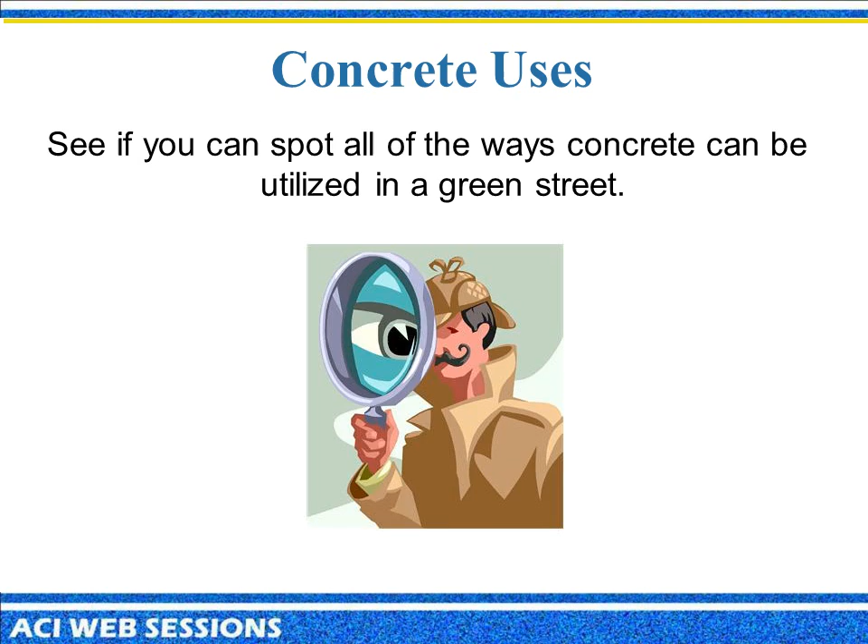Safer walking surfaces. I've been doing quite a bit of biomechanics work with pervious concrete and different pavement surfaces, and this is a number one concern for elderly people. As the population ages, they are very conscious of the surface texture of their local pharmacy, their local grocery store. If they perceive it as a slippery or unsafe surface, they do not go there. They'll drive farther across town to go where they think it's safer or brighter, and some of these people you don't want driving farther to find a safer surface.

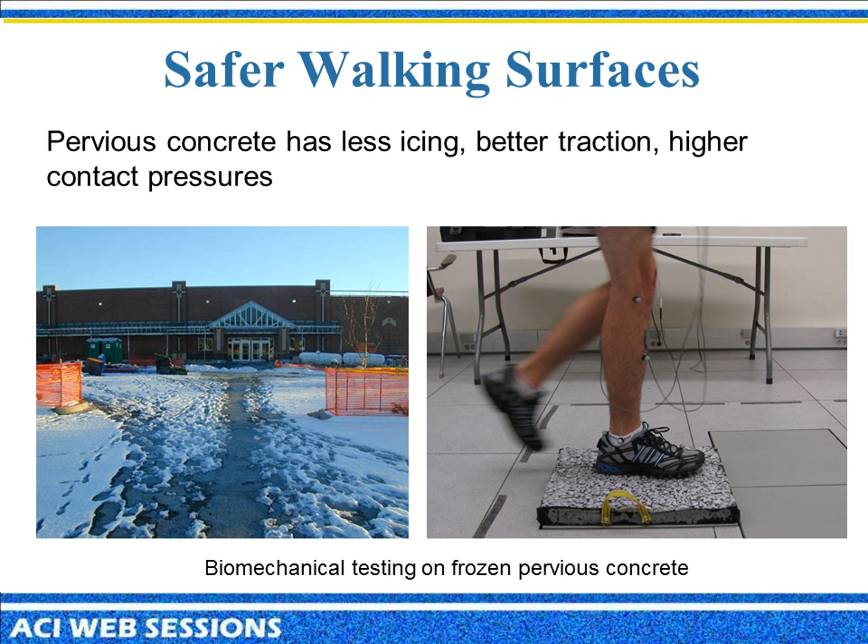I'm a civil engineer and I've got a biomechanics grad student right now, and we're looking at the biomechanics of walking on frozen, wet, icy pavements. We know that snow, ice and water go through pervious pretty well, but it turns out we can quantify that it is a much safer walking surface. It melts off quicker, it's got a higher coefficient of friction on that initial slip, and these are safer pavements. So things that are hard to quantify, but to consider as well.

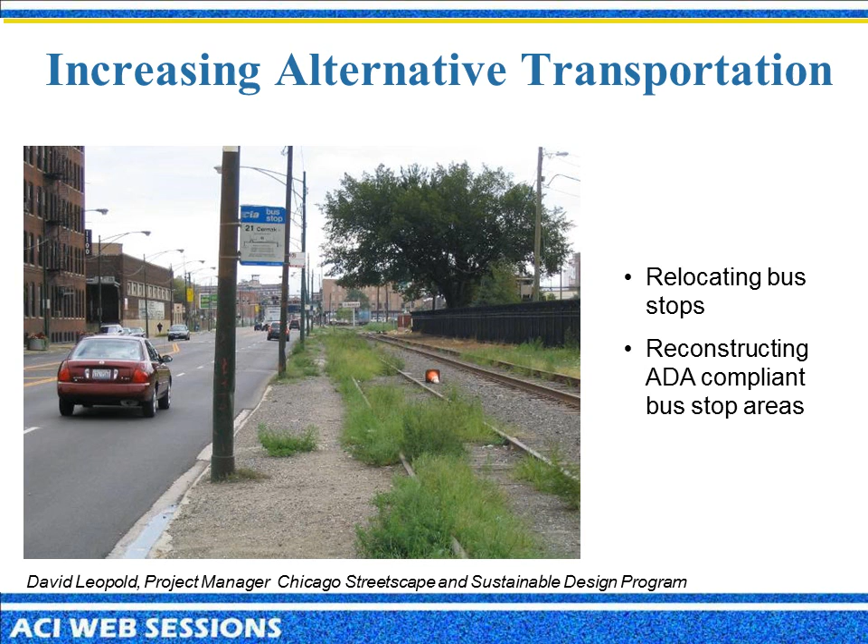Alternative transportation, relocating bus stops, making bus stops ADA compliant. I waited at a bus stop like this yesterday that's kind of in not the greatest areas. So if we want to increase the use of alternative transportation, you have to invite people to want to use the alternative transportation. Improving access to alternative transportation.

So here's Cleveland. We've got clearly marked bike lanes. You go to Boise, Idaho. All new subdivisions in Boise have bike lanes that do not cross roadways. So if you want to ride to the center of town from 3-4 miles away, no problem. You're not crossing roads. You don't have any stoplights. If your children want to ride to school, you're not worried about them crossing traffic. That's a very nice place to live. If you feel like you can ride your bike, you might ride your bike more.

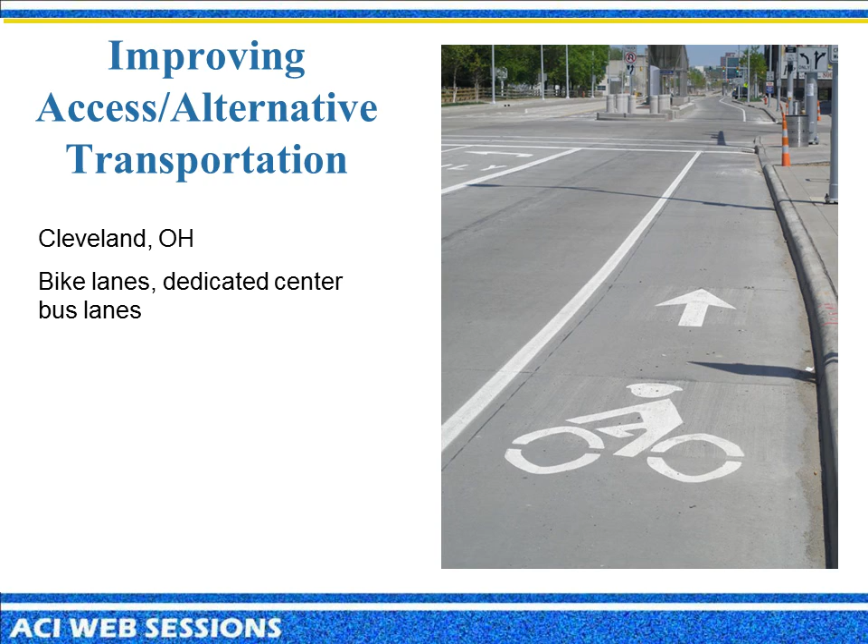And then we pulled this from the City of Chicago's webpage, but this is kind of integrating design here. So we've got light-colored, permeable sidewalks, and we've got some integrated stormwater designs, and we've got some permeable pavements or optimized pavement designs there, and then we've got optimized bus lanes.

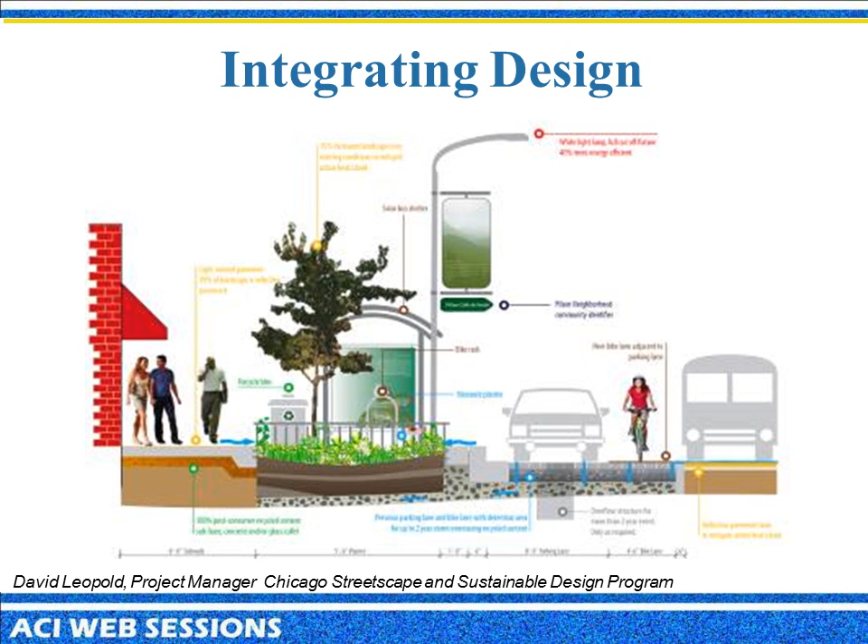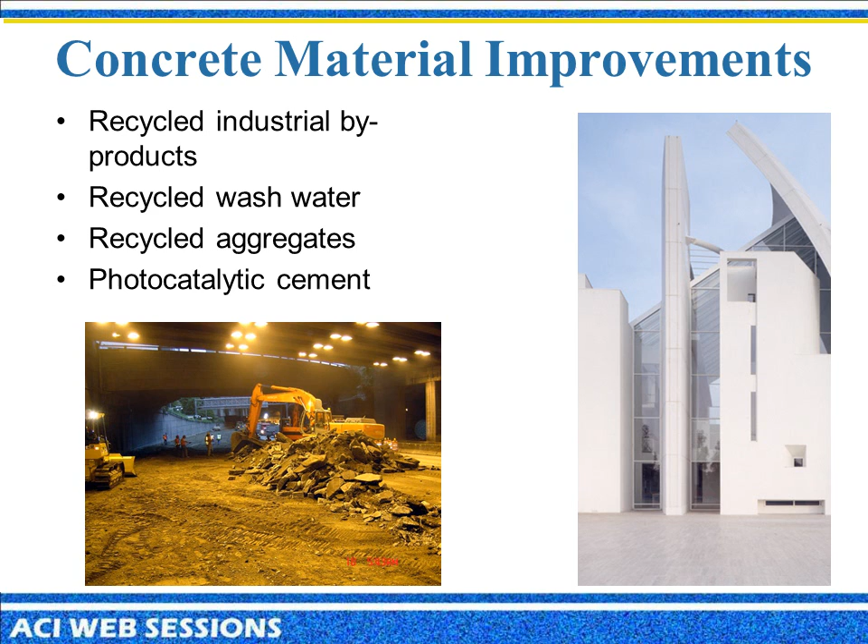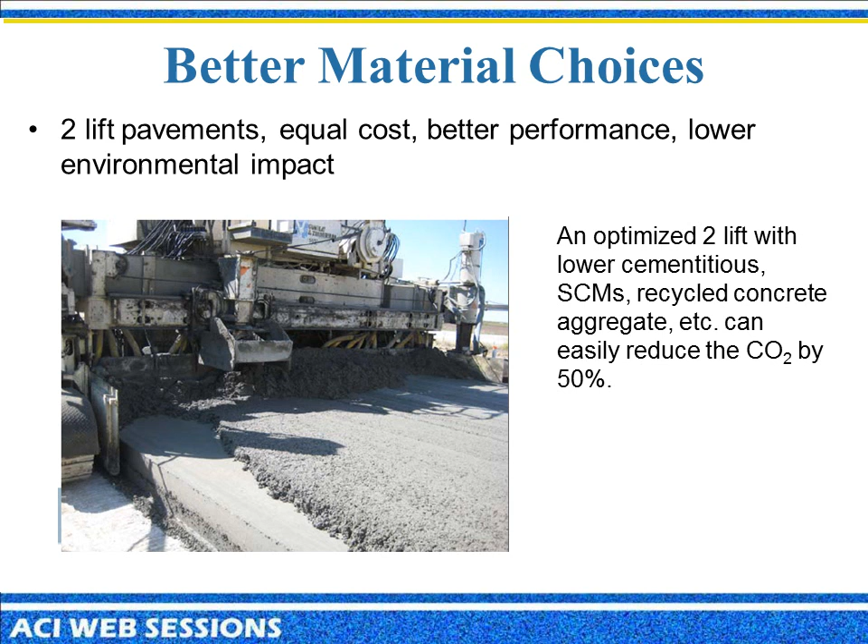So let's draw all these things together. So material improvements, we use industrial byproducts and recycled wash water and aggregates and all the good stuff that we've been talking about here. Better choices, again, two-lift pavements that Tom showed. If you've got the same performance, more recycled materials, lower CO2, lower cost, it's kind of a smart idea.

Managing stormwater. Green Streets, Pacific Northwest, this is what comes to mind. So originally, before we were all here, it was great, and the rain fell, and it soaked in, and everything was perfect, and then we put our streets in and ruined it. But streets do a lot of good for us, too. But the idea is we want to get some more water back into the ground. Do that by mimicking our former site hydrology, so do that by storing some water on site instead of letting it run off really fast. Let it infiltrate into the groundwater, let it evaporate, let it uptake in plants, and let it get detained.

So if you look at this presentation, I've got some pretty decent references on there. If you're looking for low-impact design manuals that are available, City of Seattle's got their right-of-way manual. Portland has a stormwater manual that's real good. And so there's links in here that if you see some of these pictures and you say, where'd that come from? I'd like that design. Go on the web page, pull it up. They've got some fairly developed designs that you can apply anywhere.

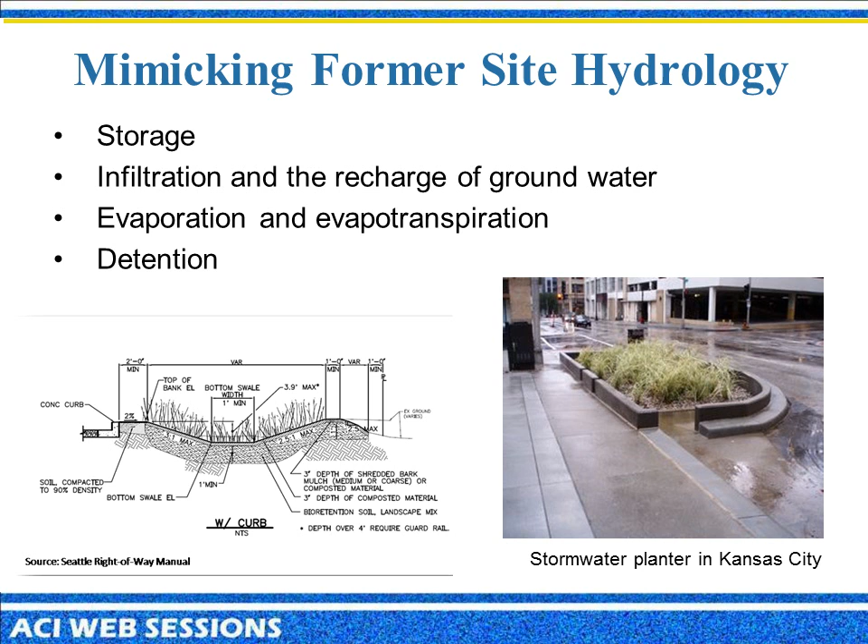So if we're talking about the stormwater technologies for Green Streets, we're really looking at three major ideas here. So we've got curb extensions, where we just take our curb and bump it out. We can dig down into the pavement, or we can do it on the surface there. We can do our permeable pavements, and then do stormwater planters. The water goes in, it's detained. Some evaporates, but we're going to clean it as well.

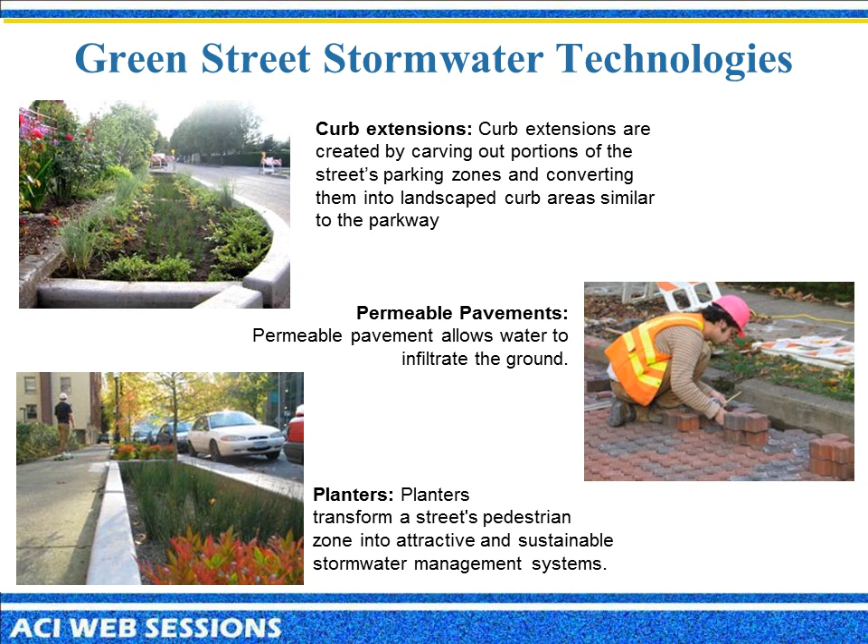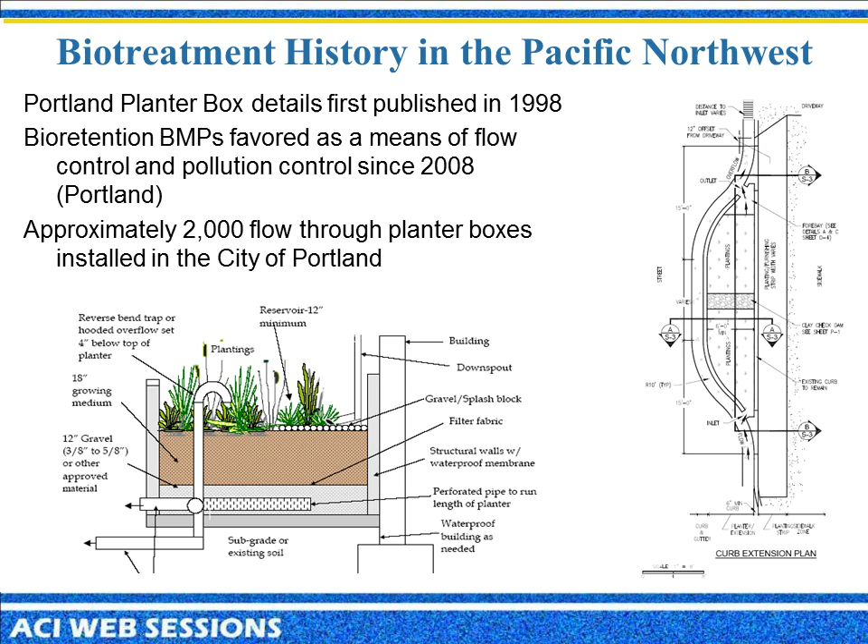Okay. Biotreatment, Pacific Northwest. They are farther advanced than most everybody else, but really started in the late 90s. Bioretention BMPs are now their preferred means of control in the street arena. Portland's had it since 2008, and the City of Portland has 2,000 plus flow-through stormwater planters. So this is a pretty widespread technology here. Water comes in, here's a curb cut, we've got our plantings in there, some check dams, water flows through, and then whatever is clean, slowed down, goes out the other side.

This was the 2006 American Landscape Architect of the Year award winner. This is the Siskiyou Street curb extension. We've got a residential area, need to treat stormwater, and don't have any place to put a traditional detention pond. So what they did was take two stalls, with water running down the curb line, and put these curb extensions on there to manage the stormwater. It helps with the stormwater volume, helps with the rate coming off there, and helps with some cleaning.

They do like this. It's traffic calming, so you are now funneling traffic there. You're only dealing with one car each direction, so it's helping with some pedestrian safety with pedestrians crossing right there. So here's a close-up. Got plantings, again, cut in there. We've got a couple check dams and some plantings in there.

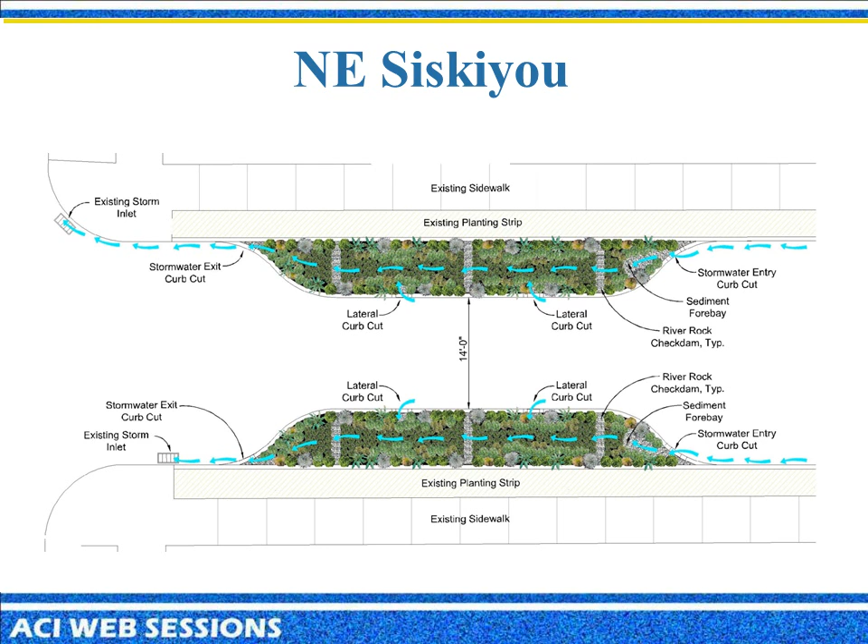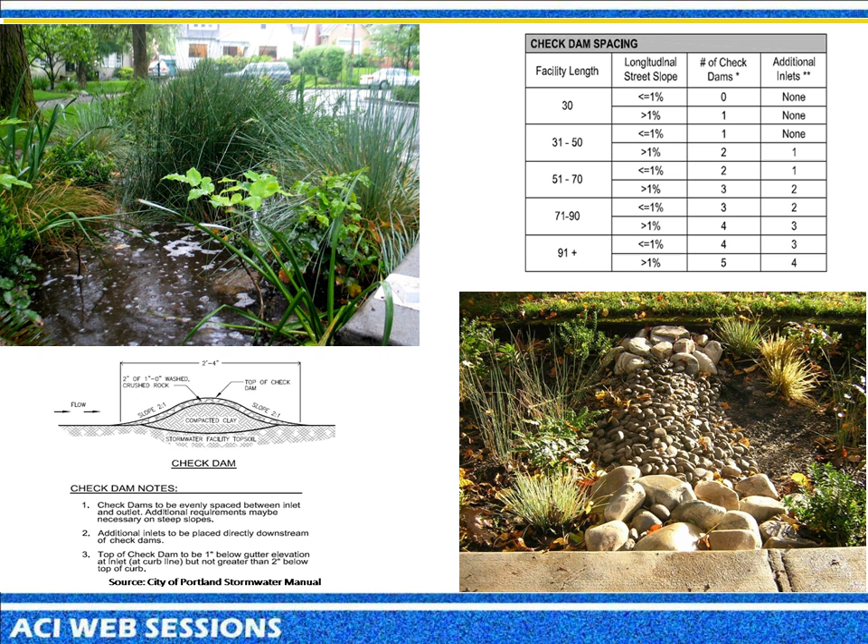So what's this thing look like? Here's a picture of check dams. We've got our topsoil, compacted clay, water comes in, got some dams. So if you look, here's a City of Portland Stormwater Manual. If you're worried about check dams, we actually have a check dam spacing guide. So there are some, I'd say, very developed design guides out there for putting these things in. So if it looks good, it looks great.

But other things to think about: we're now taking a green construction and putting it in our downtown area. We're putting it in a heavy urban area, and there are some additional considerations. Our bioinfiltration media has some sort of design infiltration rate. Same thing with pervious concrete. If we put it in, it's got a good infiltration rate, and then if we don't protect it from construction run-on of soil, we plug the whole thing up. It happens with pervious all the time. It can happen with stormwater planters. You can't let all the crud come in there before it's completely built.

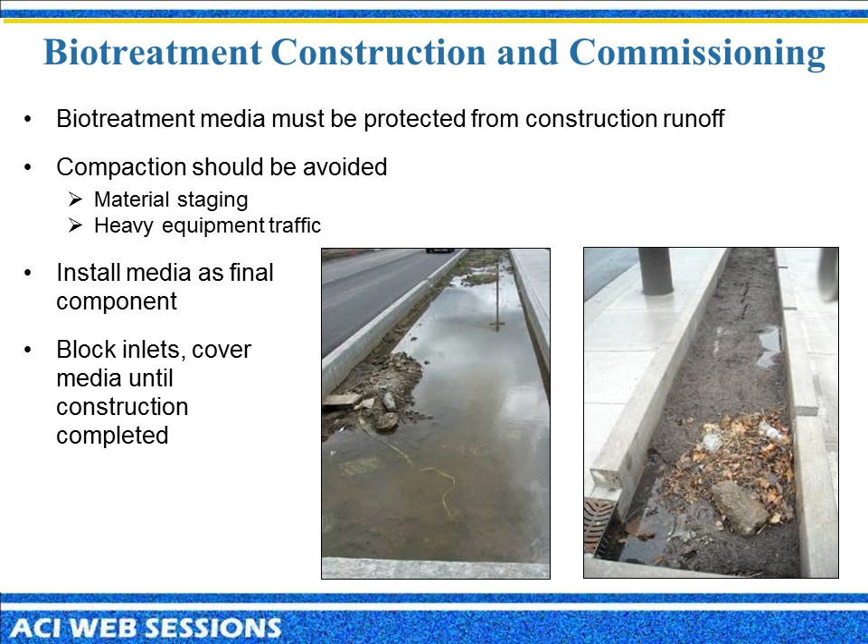Compaction should be avoided. Normally we compact our soil, but that is completely contrary to getting water in the ground. So if we're trying to get water in the ground, we have to watch the level of compaction in the soil. Typically, we'll put our media or pervious concrete in as the final component. And a lot of times we'll block these out so we don't get all this construction crud coming in and plugging it up first thing. Inspection and maintenance: same with lots of different BMPs, these do have to be inspected and maintained. They're not natural systems. They're supposed to mimic, so we have to clean out some of the trash every now and then.

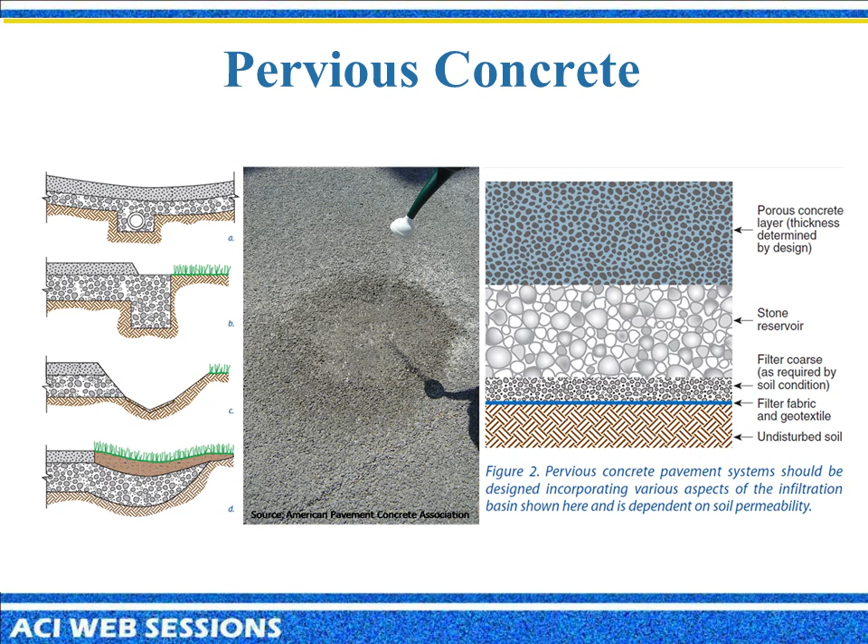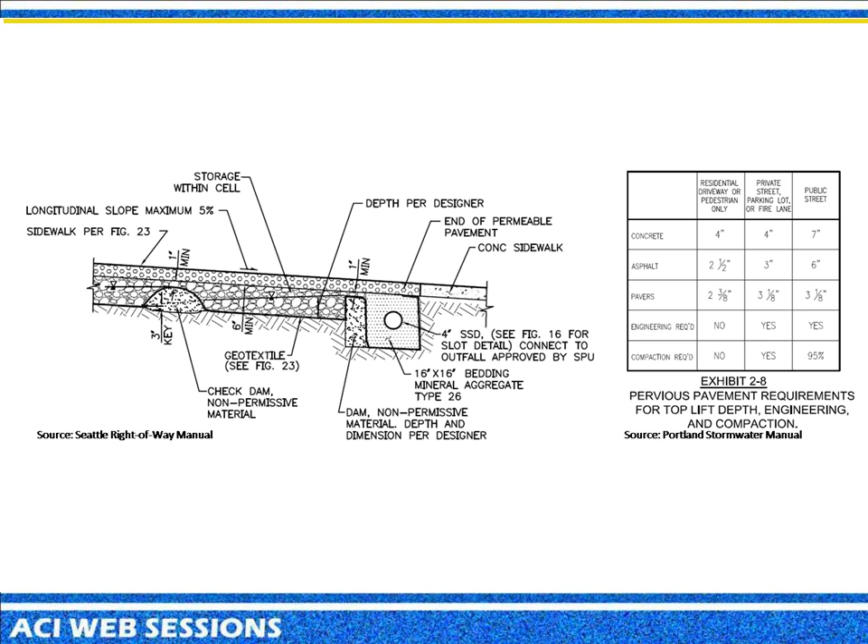We've mentioned pervious concrete a couple times. This is taking our detention pond and putting it underneath our pavement. The top pervious surface is just a mechanism to get the water through the pavement rather quickly so it can back up and infiltrate into the ground. What about designs? We've got the Seattle Right-of-Way Manual, Portland Stormwater Manual. We've got thickness design. We've got engineer requirements. These things are available online. If you need to go get the specifications, they are available.

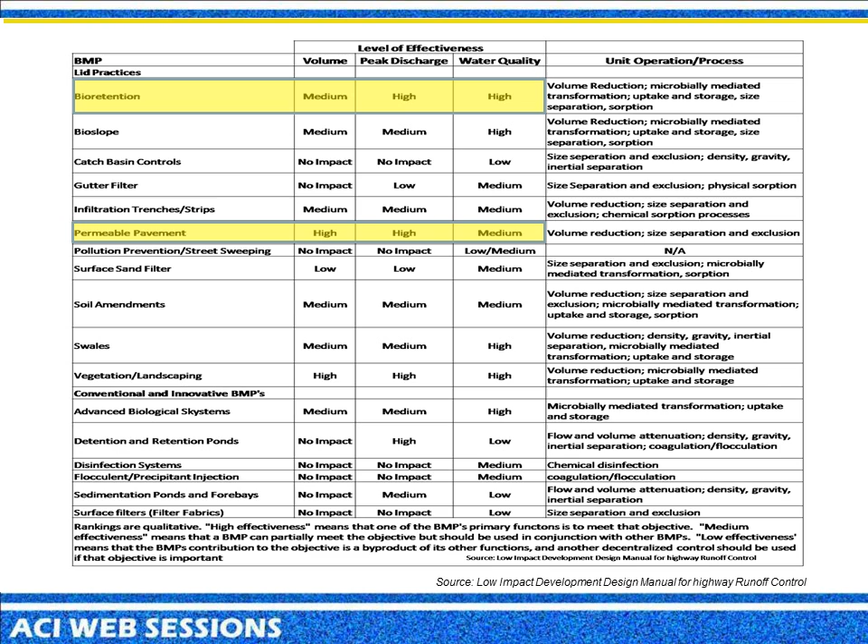Again, this is the Low Impact Development Design Manual for Highway Runoff Control. This is Washington State, but we've got different BMPs that are available, operations, permeable pavements, bioretention in there, what they treat, and where to go for the design. So these are available right now.

Urban heat islands: dark impervious surfaces absorb more energy. During the daytime they get hotter. They don't evaporate water. We get higher overall temperature. We have health problems. We've got higher energy demand. All these kind of bad things. Traditionally, what we think with urban heat islands is the downtown area is really hot. We have a whole bunch of CO2 generation and excess heat generation in the downtown area. CO2 is kind of the easy greenhouse gas to look at.

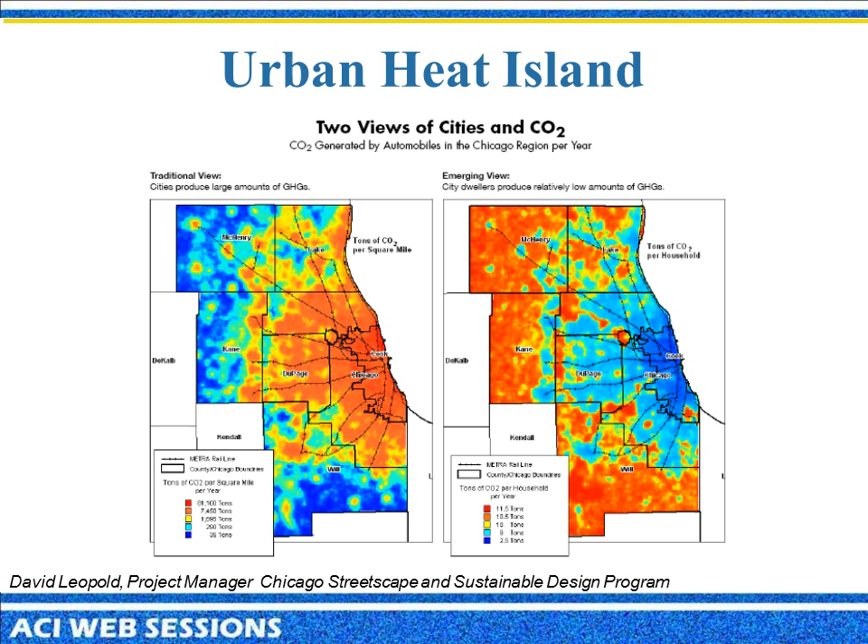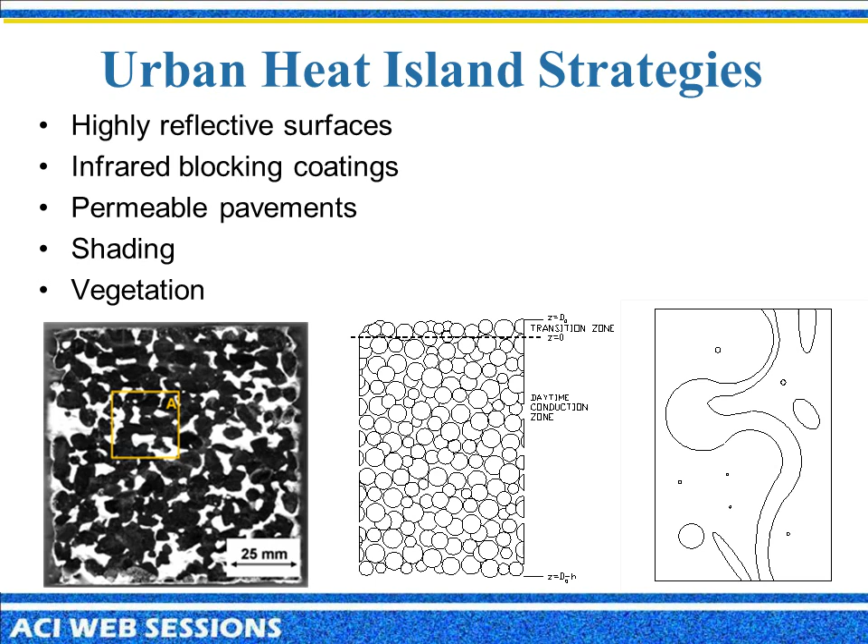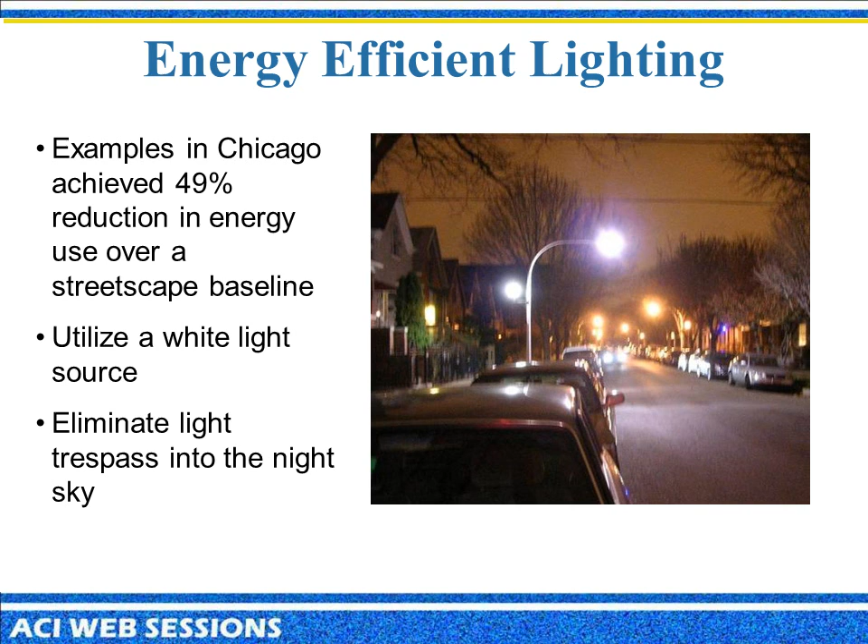Energy efficient lighting: if you've got brighter pavements, you can space your lighting out farther. Chicago's done a couple tests, and they've had a lot of success with using white light, low energy lighting, and spacing them farther apart.

Construction emissions. If we use more durable materials, we're rebuilding it less, maintaining it less, we save construction emissions, but then also using more efficient construction equipment. And this is part of the Greenroads advocates using the EPA Tier 4 emission standards on the construction equipment.

Here's an example. We take an underground mine tour with the students. They don't use electric. They don't use non-emitting construction equipment. They use the regular EPA Tier 4 diesel construction equipment down in the mine. You stand next to those, they're not belching out black fumes. You can hardly smell what's going on. We do have these technologies available.

And then public education. So it all works great, but if the public is still pouring antifreeze down the drain, we've kind of missed the whole point here. So talk about car washing, how to properly throw away chemicals, how to properly apply fertilizers, monitor soil erosion, and then littering and pet waste are also big areas of public education.

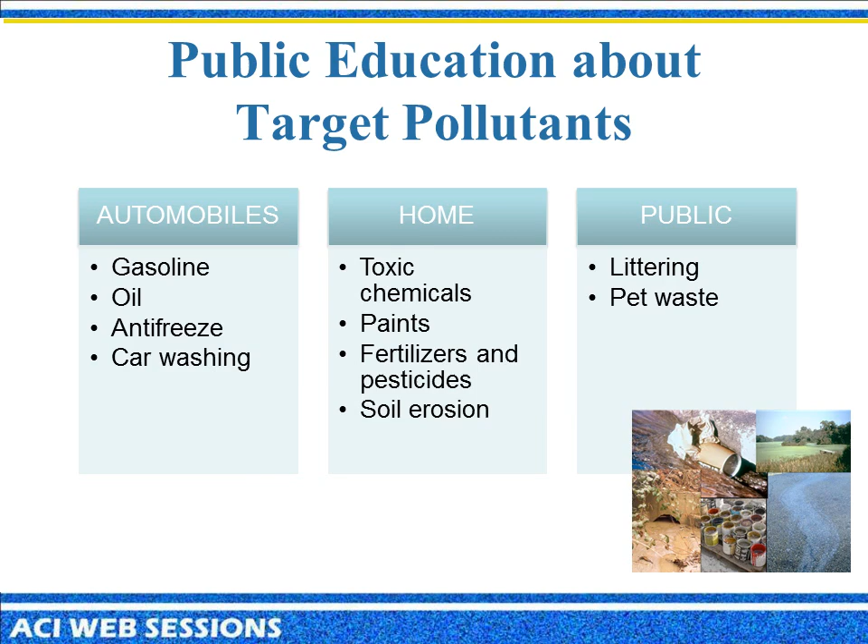Couple case studies. Austin's got a Grow Green program where they're trying to help you optimize your fertilizer and then trying to pick up pet waste. And they reduced 135,000 pounds of pet waste. This normally goes into the stormwater. We can have a little bit of education, some really big improvements.

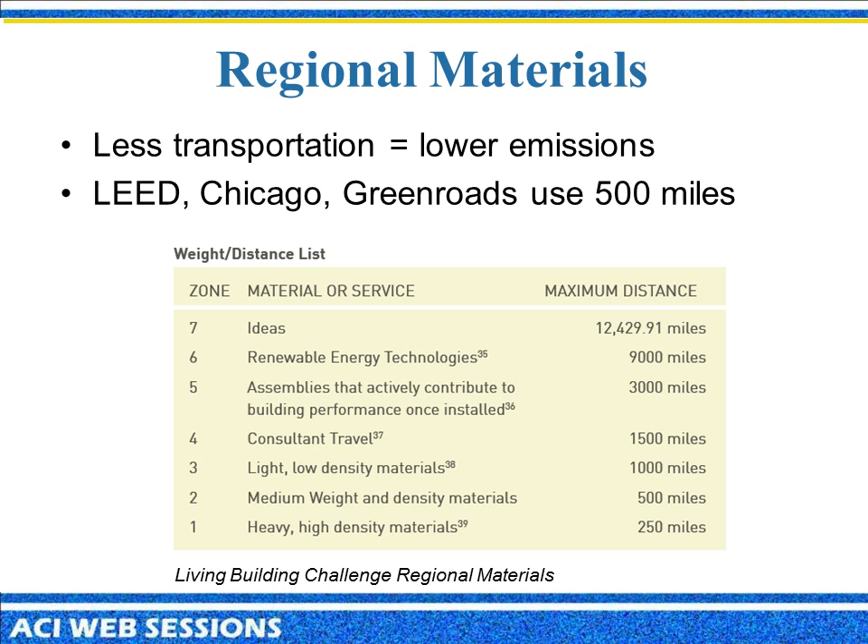And then regional materials, Living Building Challenge. LEED uses 500 miles. Some of the different rating systems use lower miles for heavier materials. So what's a green street? Trying to look at everything at the same time. So for more information, here's some real good stormwater management design manuals.

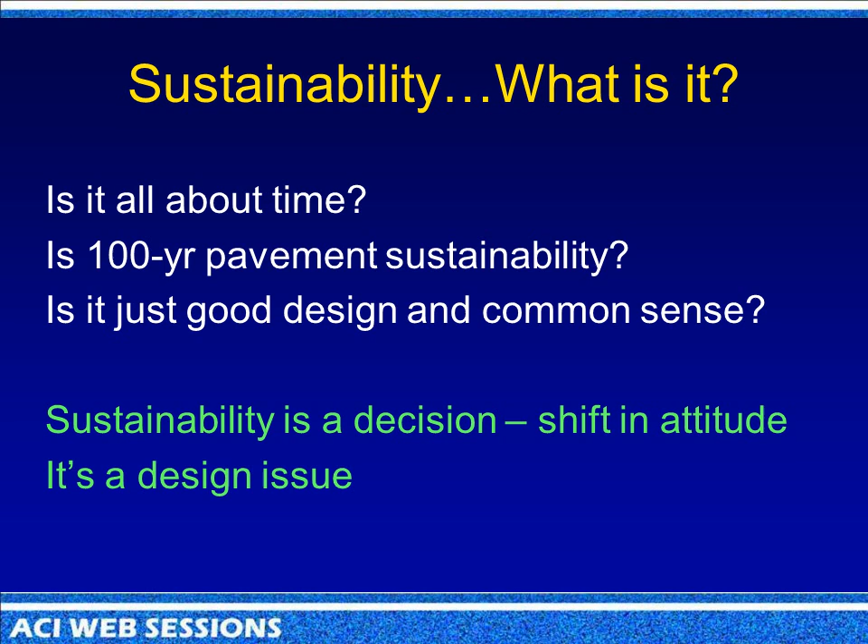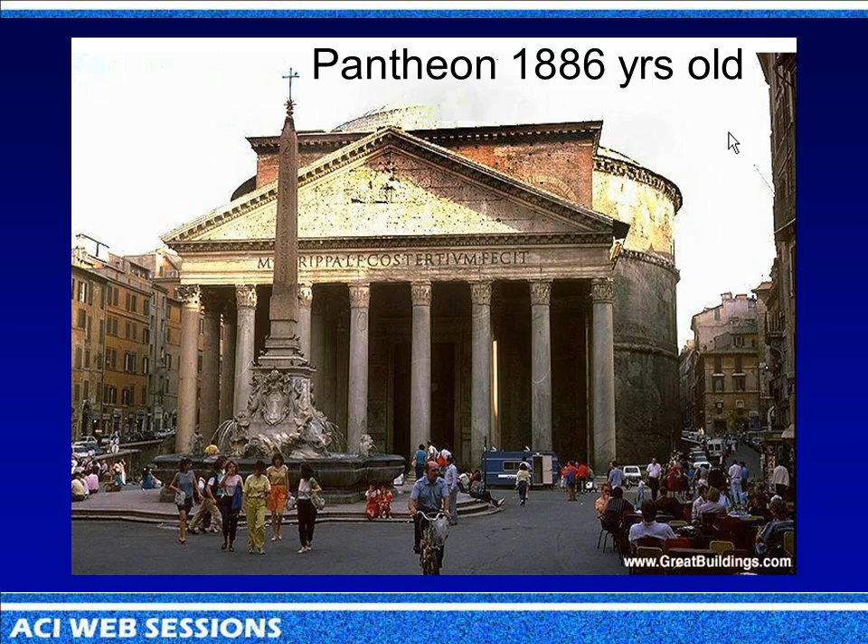Here's a great example of where the engineers knew about sustainability. The political and the economic part of that industry did not, and the Roman Empire collapsed. The reason I point this out to you, see this dome on top? This dome is lightweight concrete. It's been around a long time. Now, you might say, well, there's no trucks driving up there. There's no freeze-thaw up there. Well, take a look at this.

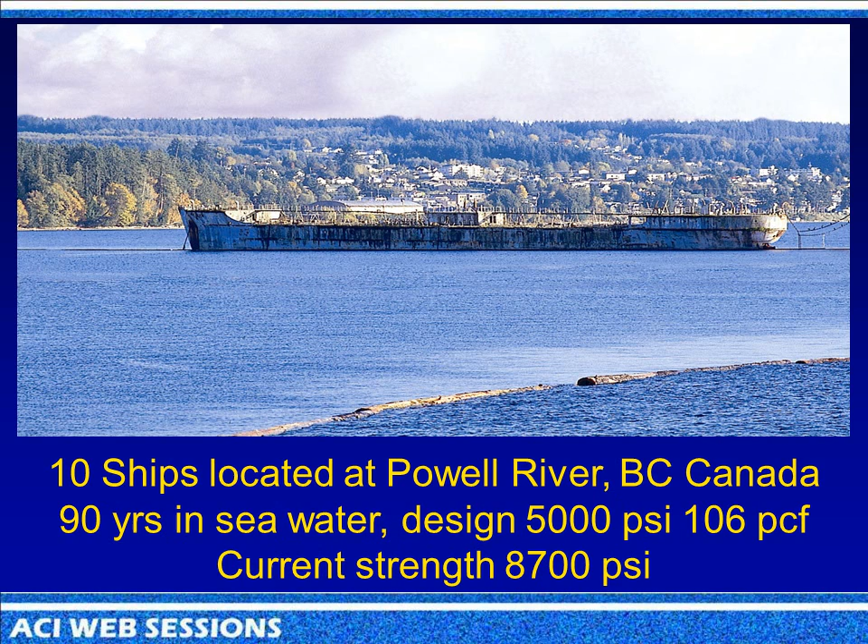This is a concrete ship built 90 years ago, 100% lightweight. The hull of this ship was only 4.5 to 5.5 inches thick. 100% lightweight concrete. And here's its sister ship that was built the year after that one. It's still floating today. Now, it looks a little banged up, but if you were out in seawater and freezing and banging around, you might look a little banged up too, but it's still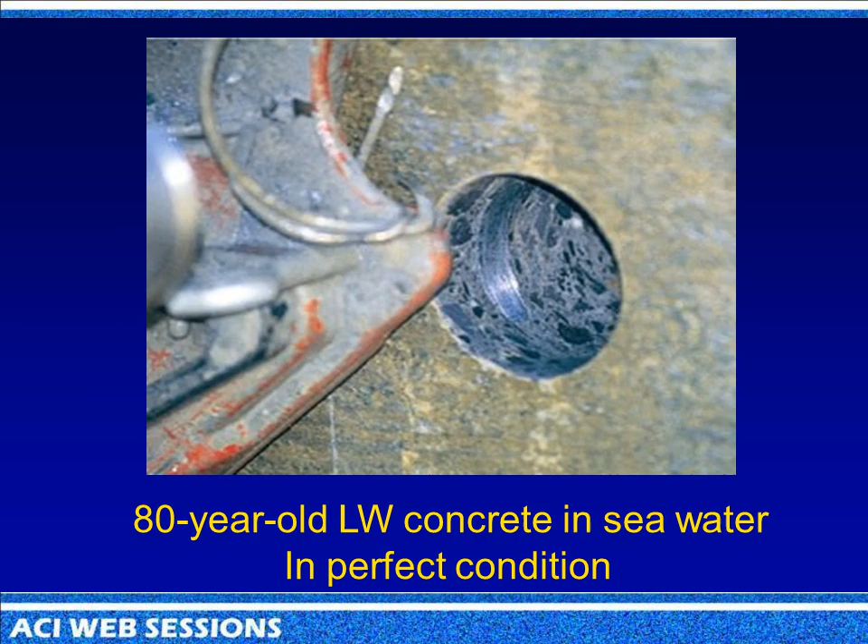floating. And we went out there 10 years ago, and CTL core drilled it. This is in the splash zone, so take a look at this. There's only 3/4 of an inch of cover over that steel. This concrete was in absolutely perfect condition. CTL wrote a big report about it, and they said it was a pleasure to look at concrete that was in perfect condition. No air entrainment, folks. Zero air entrainment.

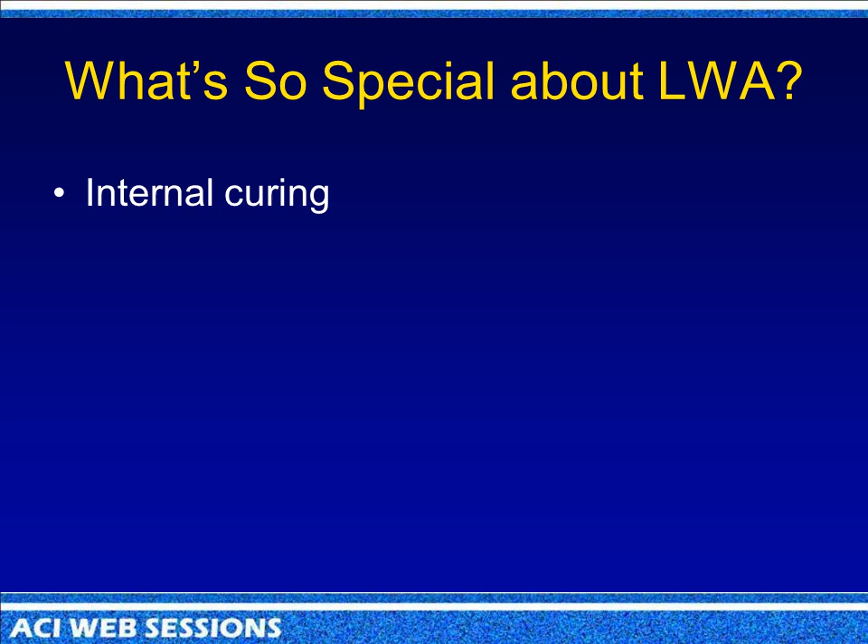So there's something special going on with this lightweight aggregate, and what is it? What we're talking about is a material that's half the weight of sand and stone and gravel and dirt. So what's going on with this stuff? Well, it's internal curing. It's a unique process that just happens naturally. So the use of internal curing, I call, is a common sense addition to the sustainability of concrete. Now, it's not new. We've been doing this since the 1950s. We called it self-curing. We called it lightweight concrete.

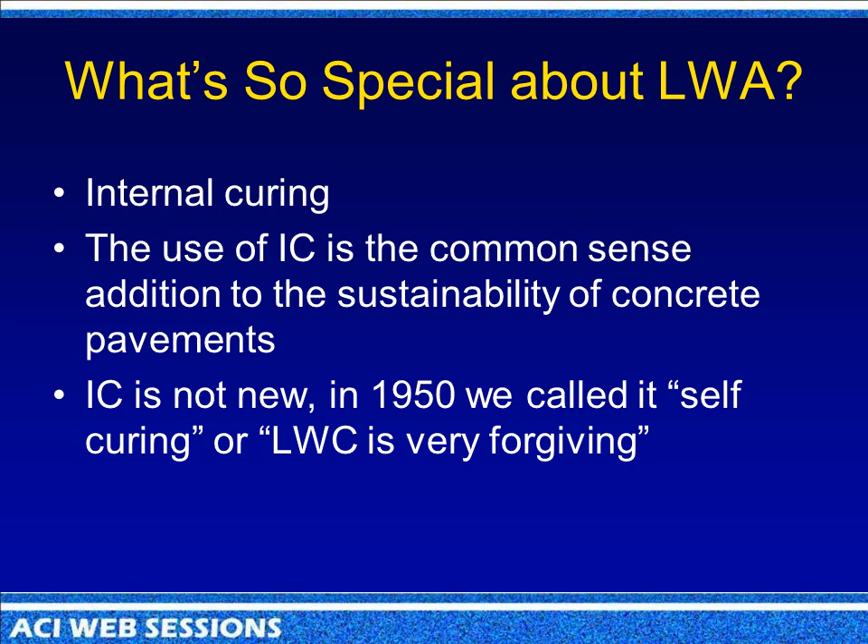It's very forgiving. In the field, they abuse lightweight concrete. They abuse it bad. They pump it up there at 10-inch slumps, and it always performs. Here's the basics of internal curing. The one on the left is just a regular Portland cement mix, or it could be fly ash. When it hydrates, as you can see, all this water in here, it creates a void. In other words, it's starving for water. Well, you add lightweight aggregate to that same mix, and the lightweight aggregate has absorbed water in it.

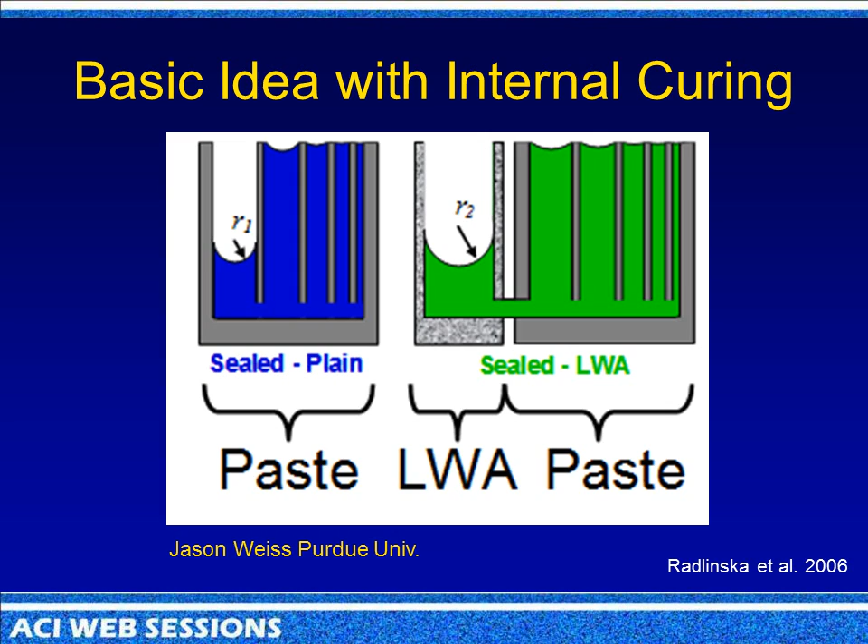Well, it pulls the absorbed water out of these larger pores, sucks it into the cement paste, and therefore you always have 100% moisture needed for the hydration of the cement. So what is internal curing? Well, here's the ACI definition.

I'm not going to read that for you, but they add pre-wetted lightweight aggregate, and it's to help hydration, and it eliminates self-desiccation. This is a big thing. And they predominantly use fine aggregate. Fines or intermediates, and they don't use a lot. It's maybe 300 to 450 pounds, 5 to 7 cubic feet per mix. And it's especially helpful for high-performance concretes with low water cement ratios and supplementary cementitious materials. But it's beneficial for all concrete.

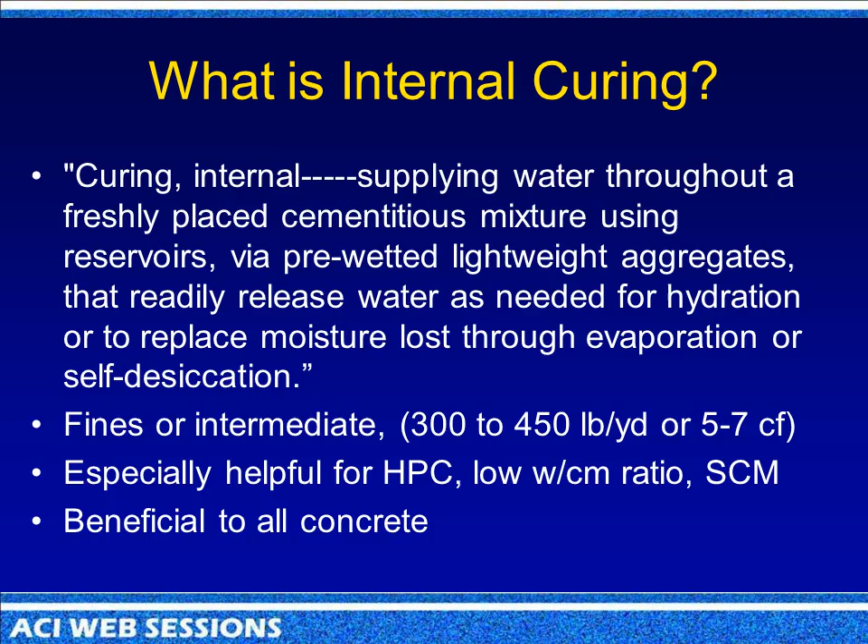So internal curing, here's a great study done down in Chile by Dr. Lopez. I don't know if he's in the room, but he's running around out here. They did 10 concretes, water cement ratios going from 0.4 to 0.5. So these are not high-performance mixes. These are day-to-day mixes. They stripped these things at 24 hours. They let them set at room temperature and at 50% relative humidity, and this is what they found.

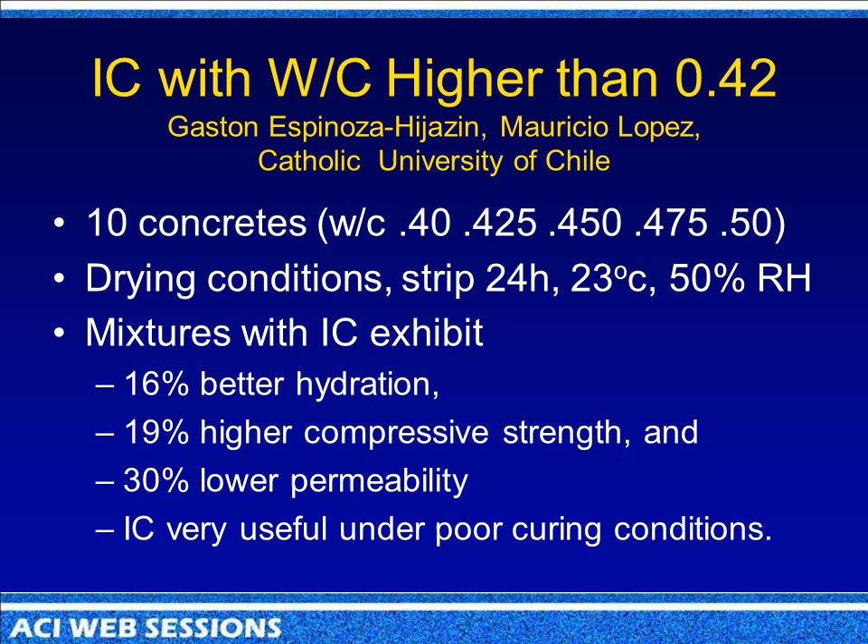Now, this is pretty impressive. 16% better hydration, 19% higher compressive strength, 30% lower permeability, and internal curing was very useful for poorly cured concrete. Now, where can you get poorly cured concrete very quickly? On pavements, on surfaces, a lot of evaporation. Purdue came up with the same thing. Look at their water cement ratios here. The internal curing one definitely had better hydration than the one without internal curing. So it's not just coming from one source.

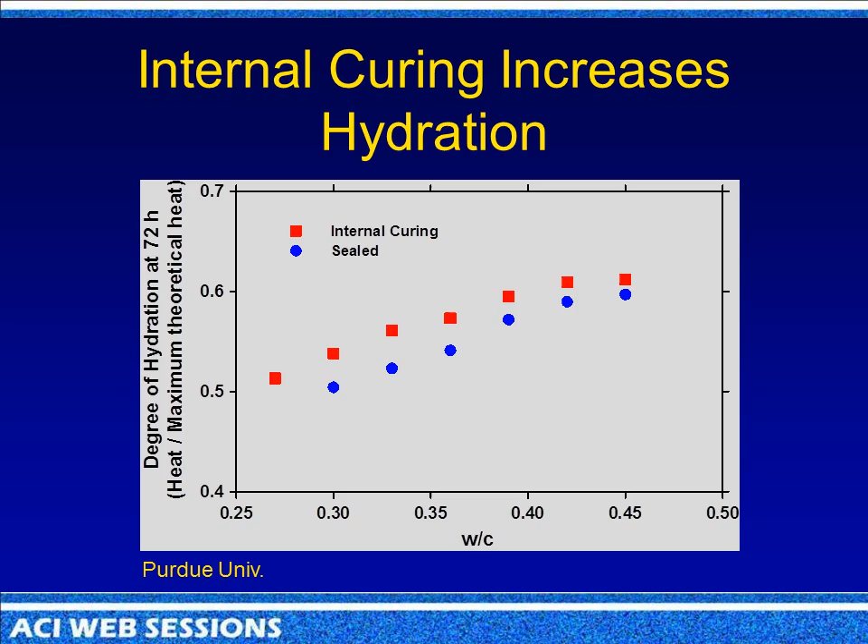So we design for intended service life. So pavement durability is about crack control. And it starts with the microstructure, the micro cracks. And the micro cracks usually happen right around the aggregates or in the plastic shrinkage and whatnot. So reducing the micro cracks improves durability, improves longevity, improves service life. So structural lightweight aggregate is about controlling cracks.

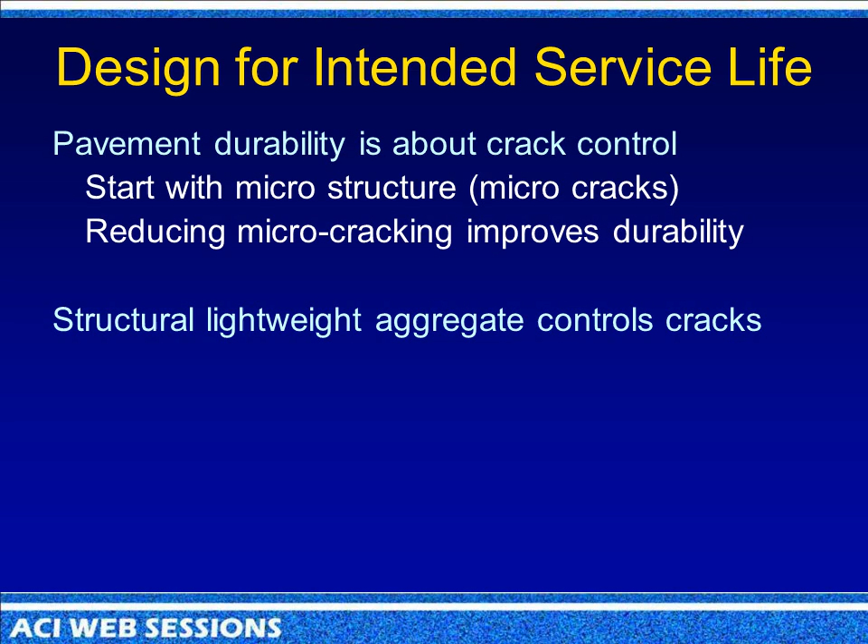Well, we're against crack. We're against crack houses. We're against all kinds of cracks. Cracks in concrete. So if you remember anything, just remember we're against cracks.

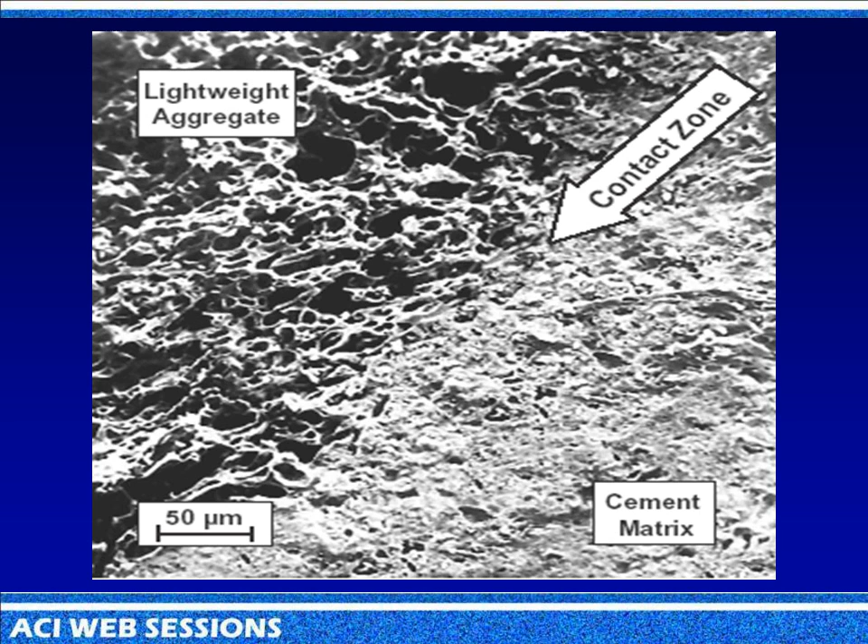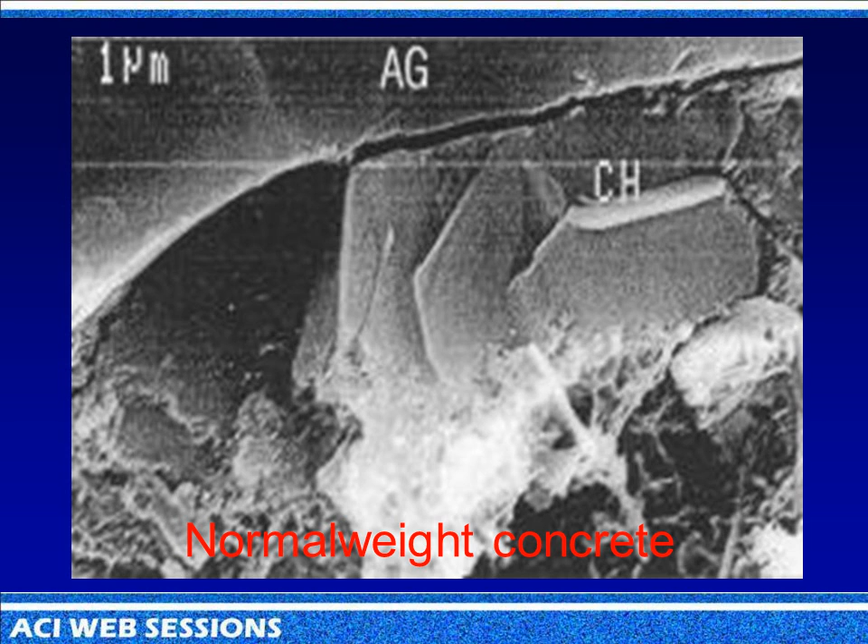So you take a look at this. Here's a great example. This is a lightweight aggregate. Here's the cement. You can see this bond between them. Here you get a closer look. They're almost welded together. And in contrast, you look at here. Here's an aggregate particle, normal weight. And here's the calcium hydroxide, the cement. And almost always you're going to find a clear demarcation, sometimes even a micro crack at these surfaces.

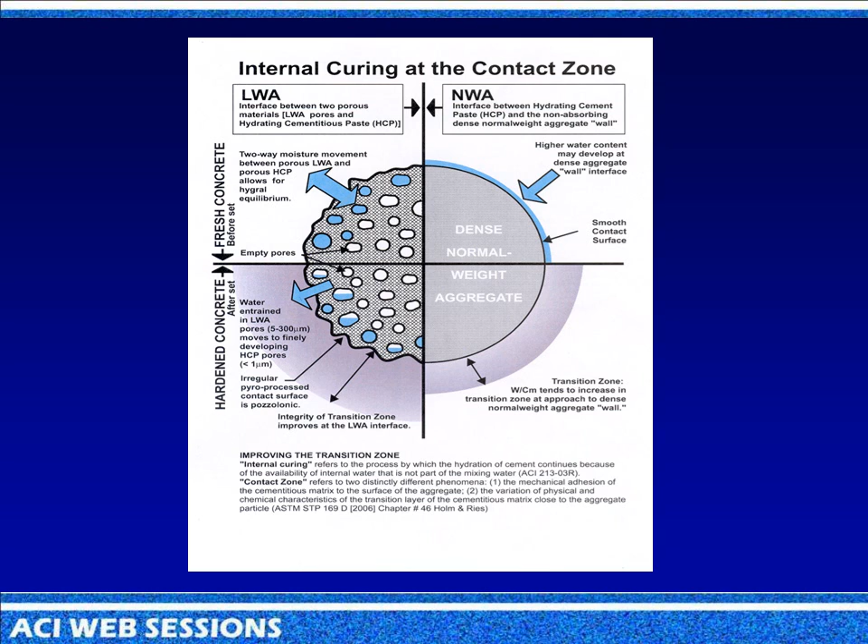Now, in contrast, over here with the lightweight aggregate, you don't get that water lens. Somehow, because of the porosity of the aggregate and everything, you get more of an equilibrium effect. And then as soon as it starts hardening, this moisture comes out of the aggregate and comes in here, and you get a lot better, what we call a contact zone.

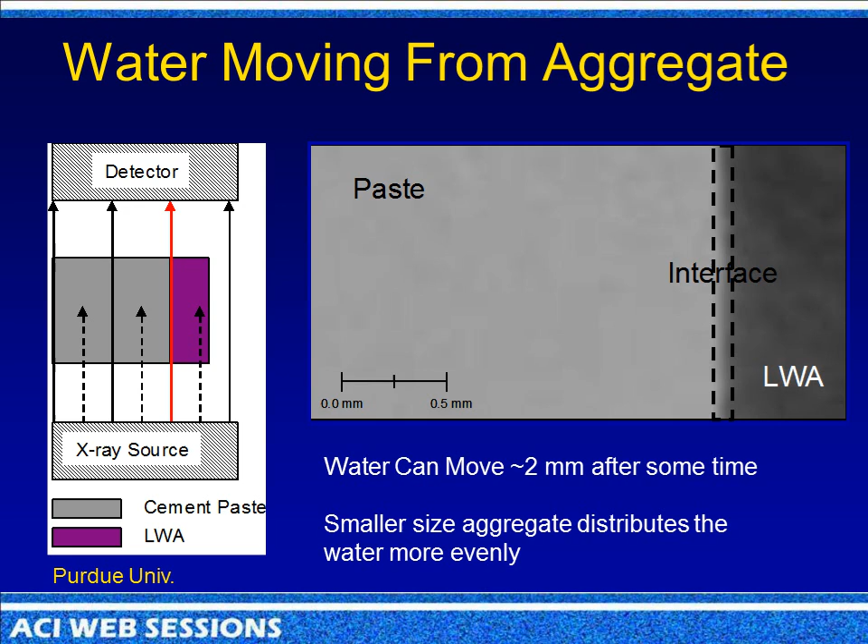Now, what you want is you want the moisture to come out with a relatively high humidity inside it. And so about up to 90%, you want this moisture to be coming out because that's when the cement really needs it. The cement or the supplementary cementitious materials.

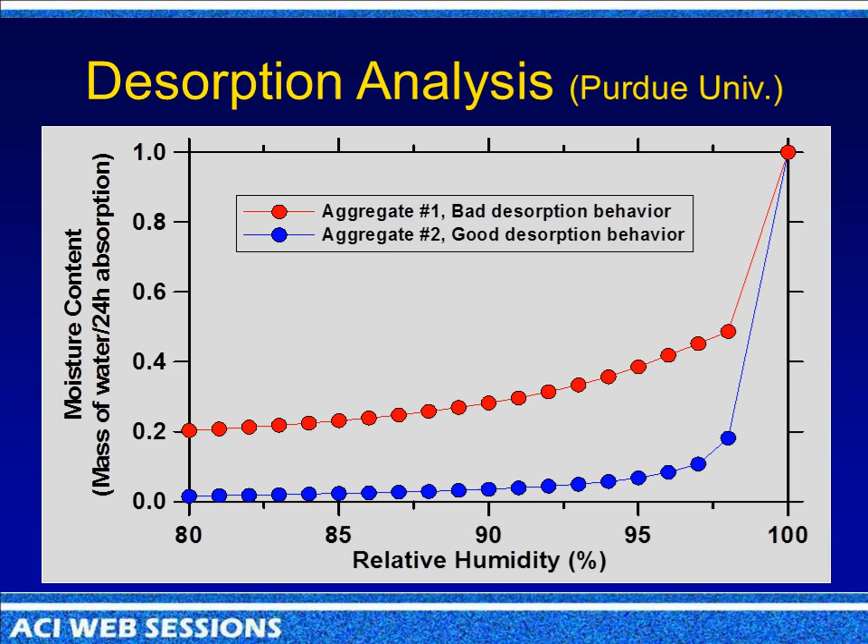So why use internal curing? Well, it mitigates autogenous shrinkage. It minimizes plastic shrinkage cracking. It reduces crack width and can even eliminate cracks. It delays drying shrinkage. It mitigates self-desiccation. It mitigates micro cracks. And it disconnects the capillaries, and it reduces the chloride intrusion, and it gains strength.

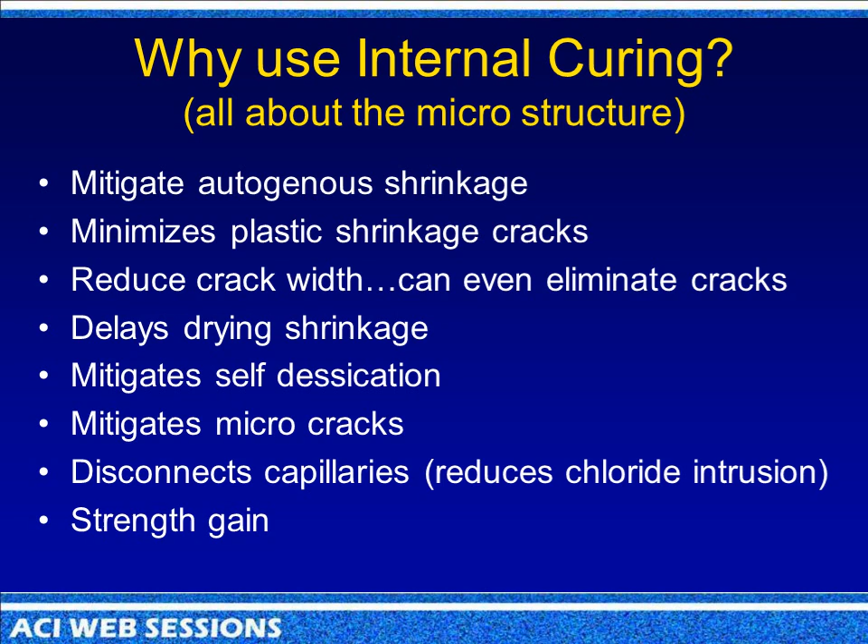Now, all I can say is, wow. I mean, that is a home run if there ever was one in sustainability, and you can get it almost free. It's just water that's in the aggregate. It's been around a long time. And it helps offset poor curing.

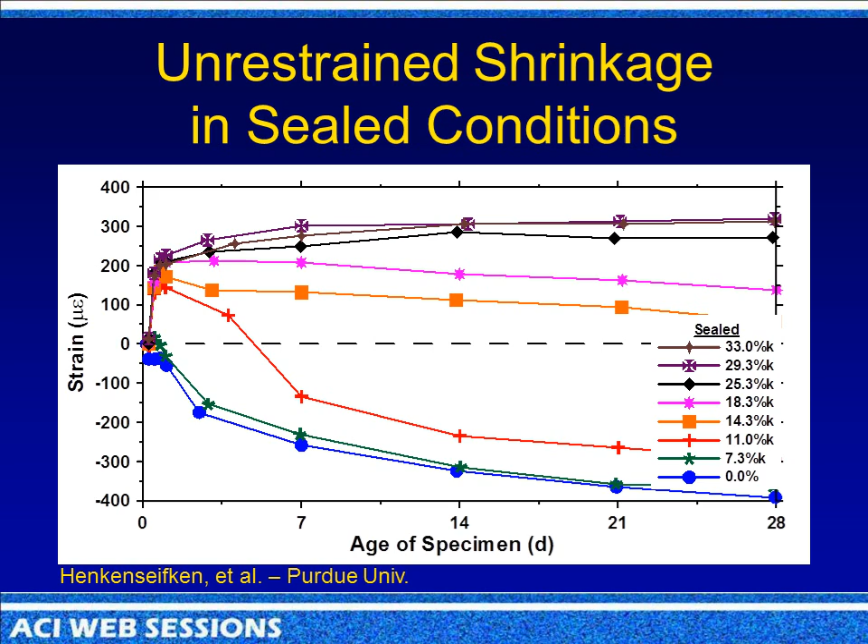And this top one, these two do not crack. And that's the same here with unrestrained shrinkage. As you can see, when you get up to this 14%, these things, they're not shrinking. And they'll go on forever. And so there's the benefit of using this internal curing.

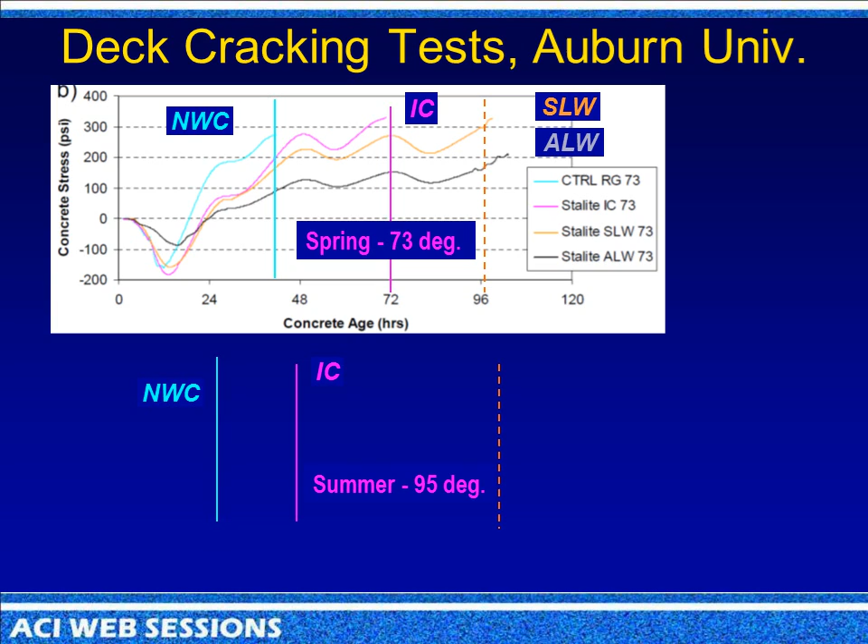Some of these slides I stole from these great professors. This is out of Auburn. The same concept here. At less than 40 hours, the normal weight concrete was cracking and the internal curing was not. Here they went out with structural lightweight concrete, all the coarse aggregate, all the fine aggregate, all lightweight. They had to get these to crack. They had to change the temperature of the cracking machine and force it to crack. And the same was at 95 degrees at a higher temperature.

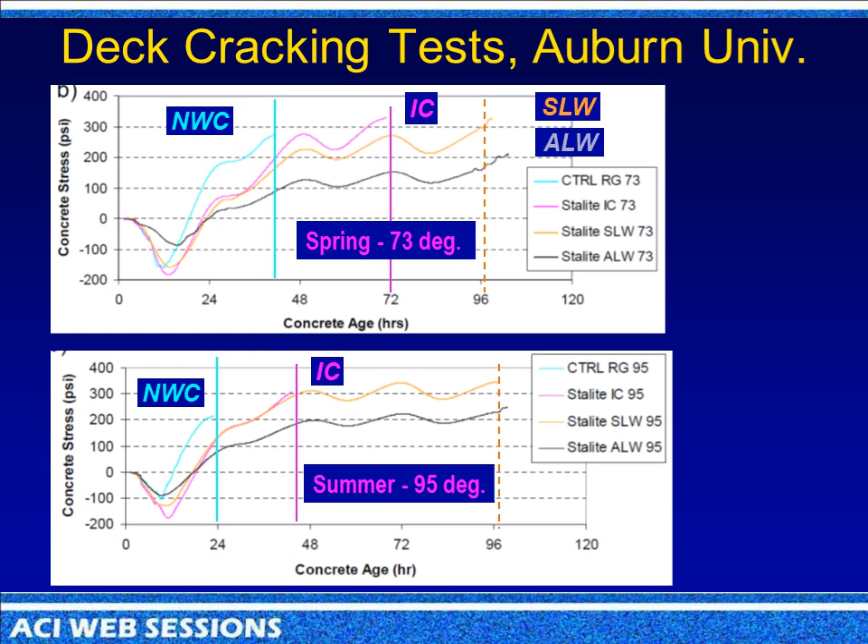It obviously cracked quicker. And the gentleman that did all of this research, he's sitting here in the room, and he might jump up later and tell you all about it. But this is the preliminary stuff, and they're just getting ready to publish their major report.

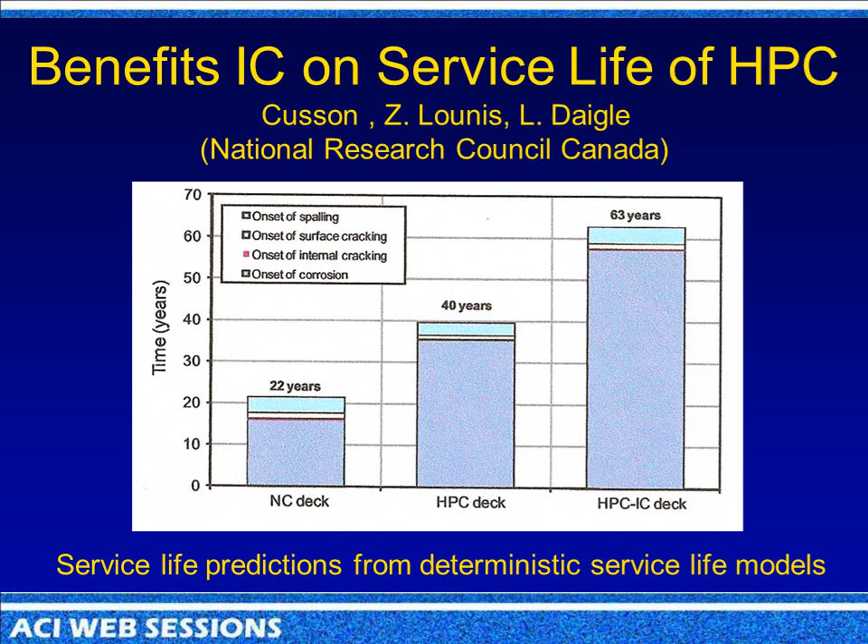Now look at the benefits here. These are life cycle models. This is normal weight, high-performance concrete. You get 40 years. You jumped 18 years from here to here. Just taking that same high-performance mix, adding internal curing, you jumped an additional 23 years. That's staggering. Here's the initial cost of these.

Now, these costs translate very closely to CO2 emissions and carbon footprint. Cost, not exactly, but there's a definite trend. So what you're seeing is a major reduction in the carbon footprint by adding extended life onto the pavement. Now, granted, we're only at 63 years here, but we're definitely pointed in the direction. There's a lot of other things you can do to concrete. Internal curing just helps those things. Judy Buffenberger talked about all kinds of great things you can add to concrete.

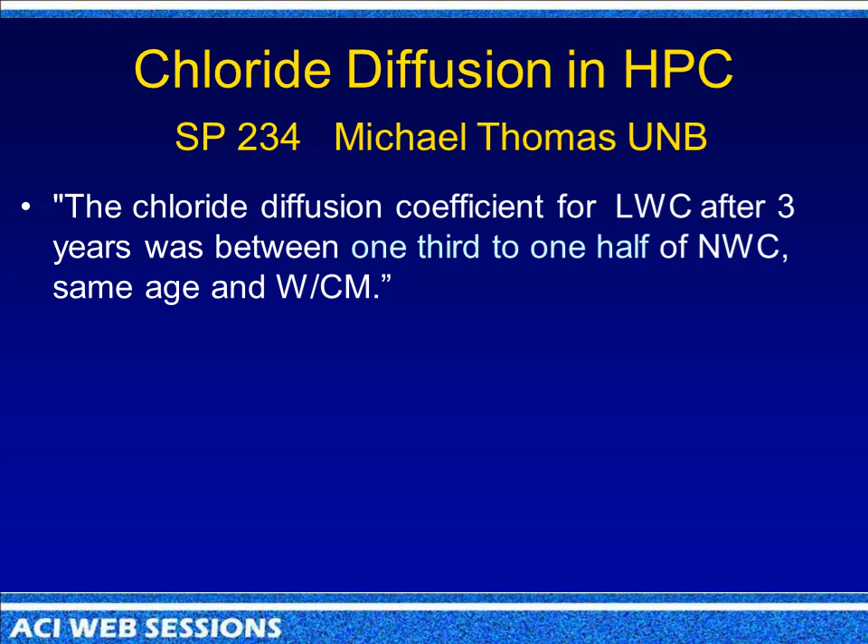Okay, chloride diffusion. Michael Thomas talked about this, and the bottom line here is at 3 years, 1/3 to 1/2 of the chloride diffusion coefficient by using lightweight concrete. And the M factor is also improved. The M factor is used in Life 365. This study was done just on the consideration of chloride diffusion only, but it definitely points in the direction of improving it.

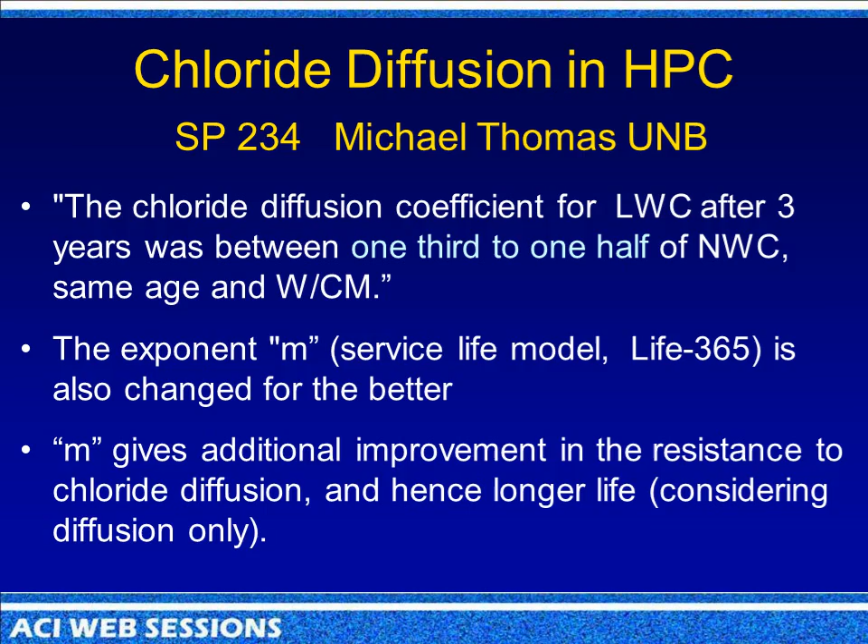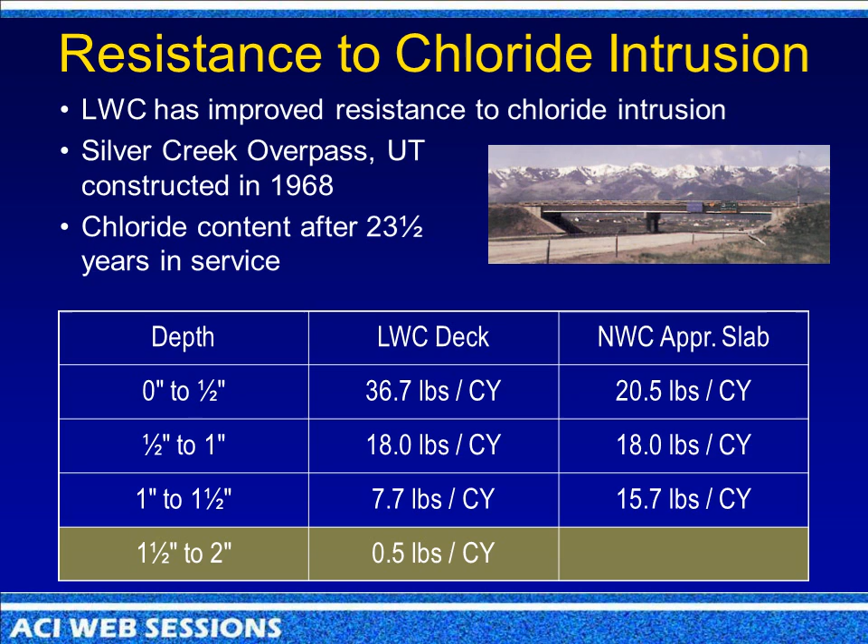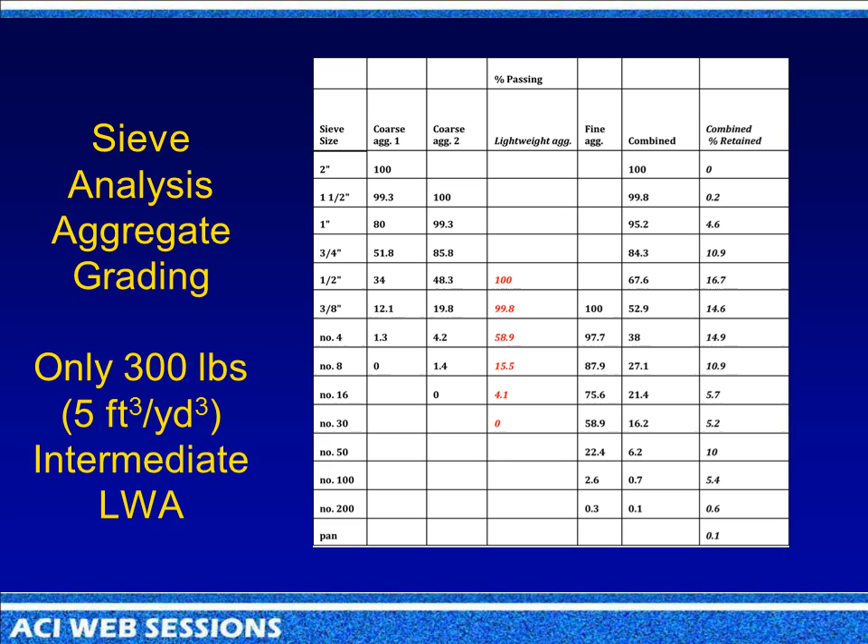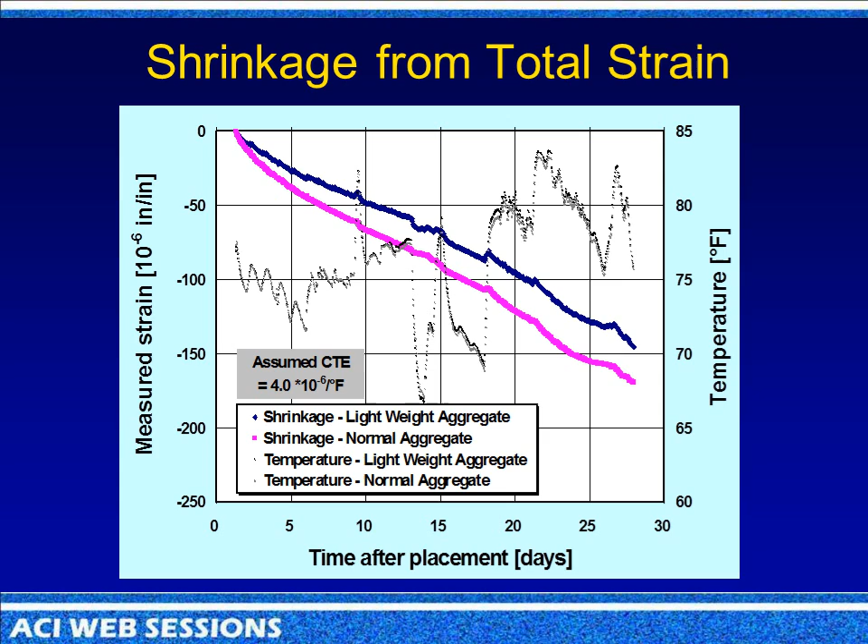And so it doesn't have to be fines. Well, we use intermediate. It's a lower sizing that we use. And here it is in real life going down. And as you can see, the normal weight was the pink one, and the lightweight was the blue one. And you can see it's averaged at about 10 or 15% total less strain.

They also did a crack survey of this particular section. They pulled out a 500-foot section. And at 76 days, Victor, I believe, and a few other people went out and did this whole thing. They found the crack spacings were 31 feet. The DOT says their normal crack spacings are about 5. These are real micro hairline cracks at about 3 to 5 feet. So they instantly noticed a difference.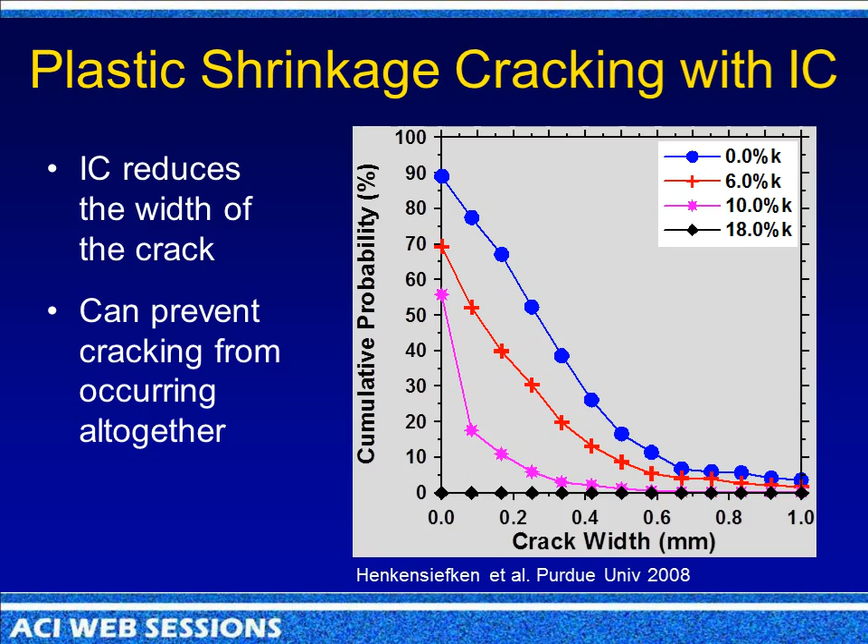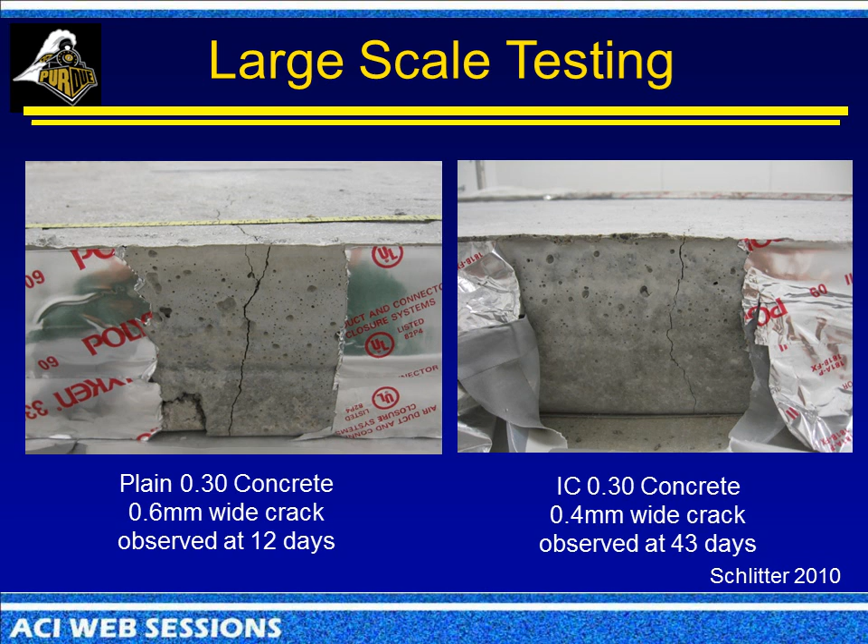Now here's some real life, some big slabs they've done there at Purdue, big test sections, and you can see they fill these with concrete. And here at 12 days, they got a 0.6 millimeter crack width, and over here at 43 days, so almost 4 times as long, they only got a 0.4 crack. And so this internal curing really shuts down the cracks.

Here's probably the largest project. This is also done in Texas, in Hutchins, Texas, 250,000 yards. And at 6 months, I think they might have been drinking or smoking something. They only found 1 crack in this whole thing. But anyway, they went out and looked, and they looked hard.

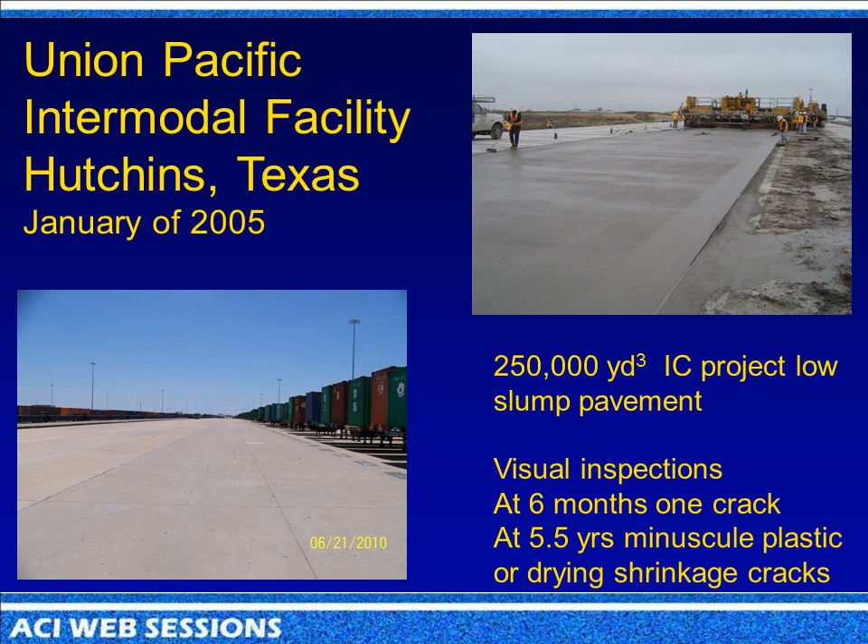But they came back 5.5 years later, and they did an extensive review. They had like 5 or 6 people running this whole job, looking for hours for cracks. And what they came out with was the plastic and drying shrinkage cracks were minuscule. I thought that was pretty impressive.

Now, the workability is also great. They love it with these internal curing mixes. They perform the same way right behind the pavers. Since 2003, in Texas, they've done over 2 million cubic yards of internal curing mixes. And these are low slump. About 1.3 million have been low slump on pavements. And most of these are on city streets.

And they're using either the 3/8 by 10, which I showed you that example, or they're using a 3/8 by 0. And probably the bulk of the work being done outside of Texas is the finer gradation, the 3/8 by 0. And I don't claim to be the expert. They say I'm a philosopher with a concrete degree. But this is what the people in Texas are going to tell you. They mitigate or eliminate plastic and drying shrinkage. That's why they like it.

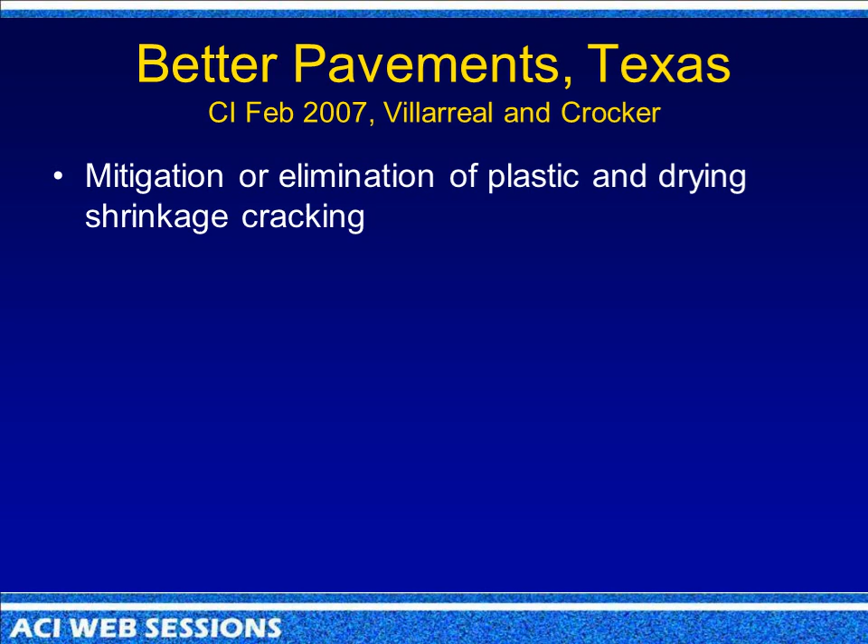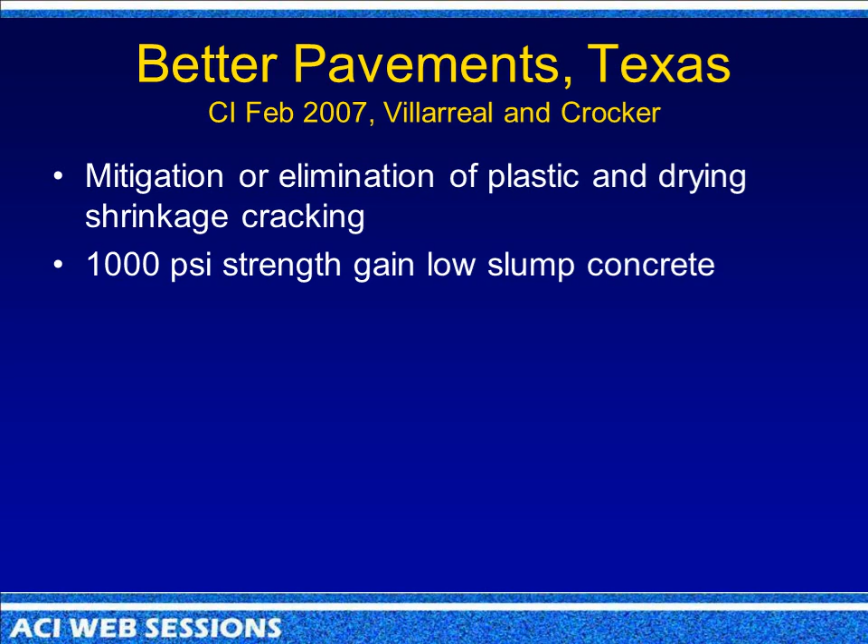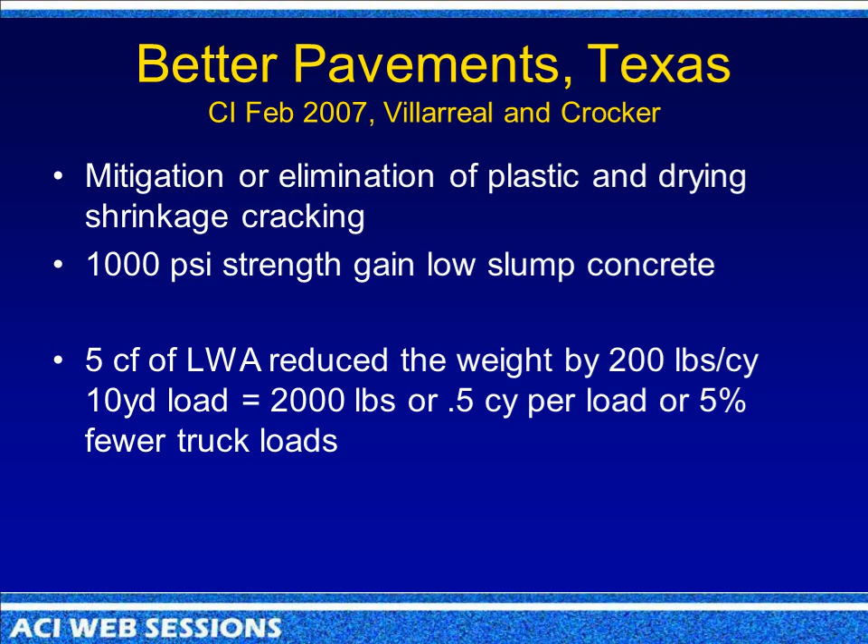They're getting about 1,000 PSI strength gain. And that's probably because part of it is they're getting a better gap grading. They're filling in for gap grading. And one of the sidebars is, 5 cubic feet of lightweight aggregate will reduce the weight of that mix 200 pounds. So if you have a 10-yard load, that's 2,000 pounds. Well, that's a half a yard of concrete. And down there, they were running 10 yards of concrete out. So they were using 5% less trucks just by doing internal curing. That's common sense. There's no rocket science about this stuff.

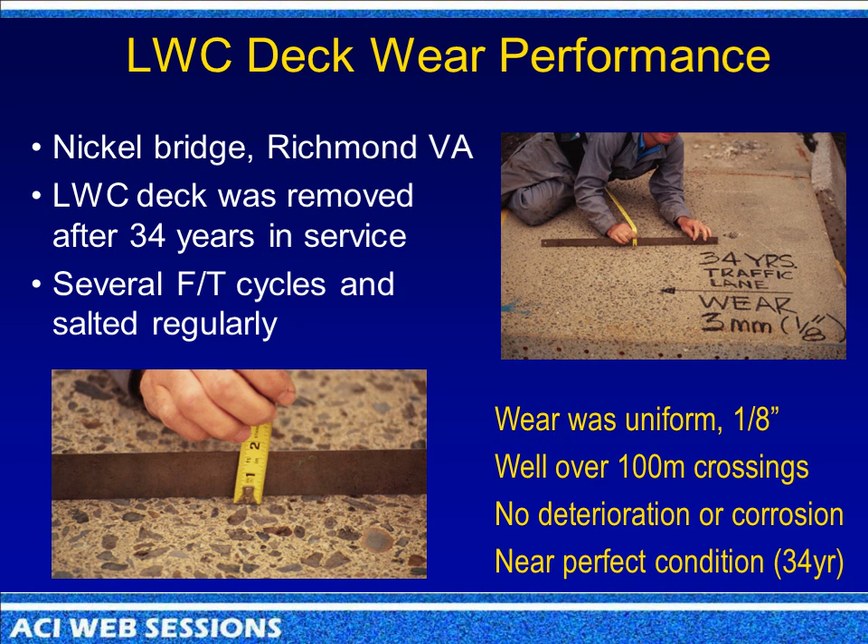So how does it wear? Here's a deck that's 34 years old. It was taken out of service because the steel frame underneath it rusted out. The concrete was in almost perfect condition, and you can see the wear was very small. That's right in the traffic lane, and what you're seeing is all this lightweight aggregate, and it's very durable. So you don't have to be afraid about using it as internal curing.

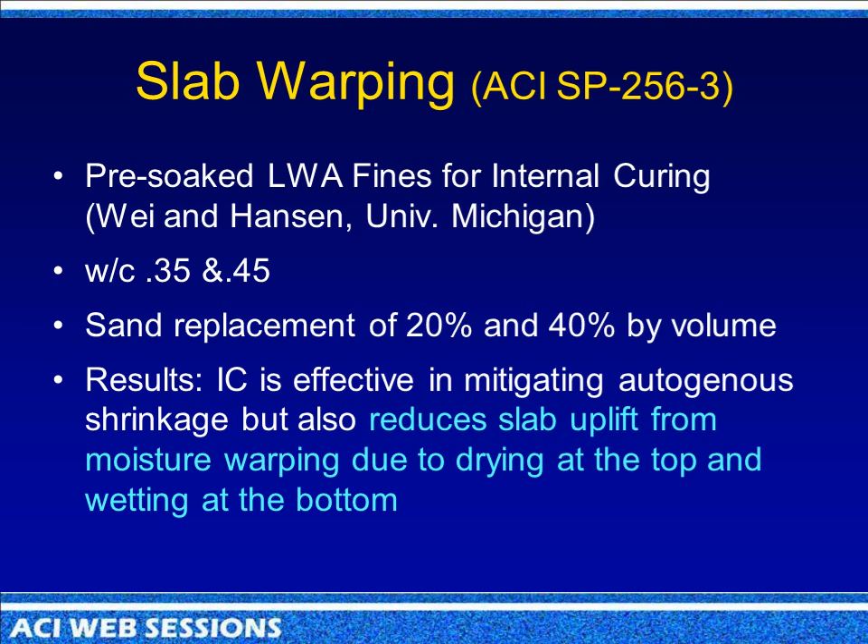Slab warping, they did some studies here, and here's what's very interesting. They said it reduces the slab uplift from moisture warping due to the drying at the top and wetting at the bottom. So they've even noticed that it can help you here with warping. And here's a project going down. It's a real test project on a bridge.

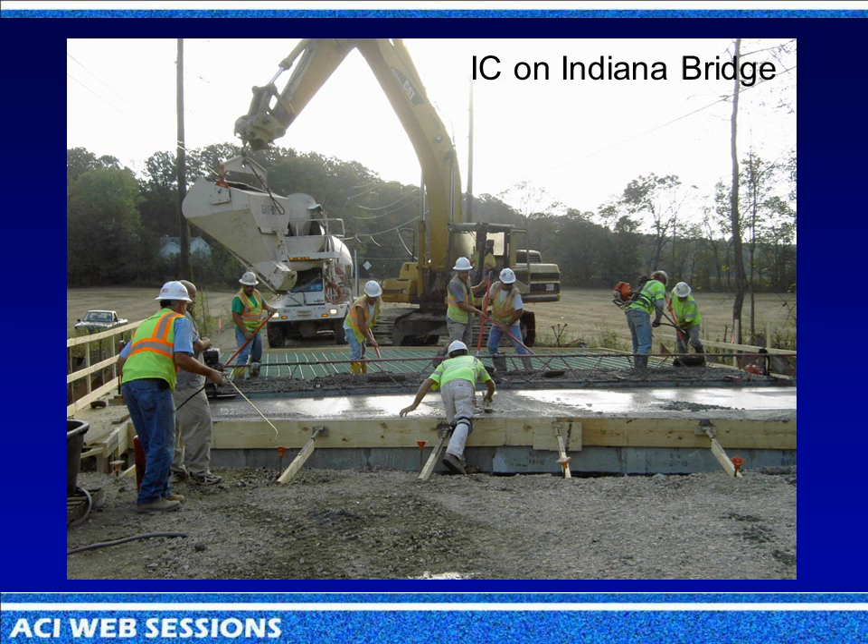This is an internal curing project going down in Indiana. It went down just a couple of months ago. There's a lot of other bridges. So I'm getting close here.

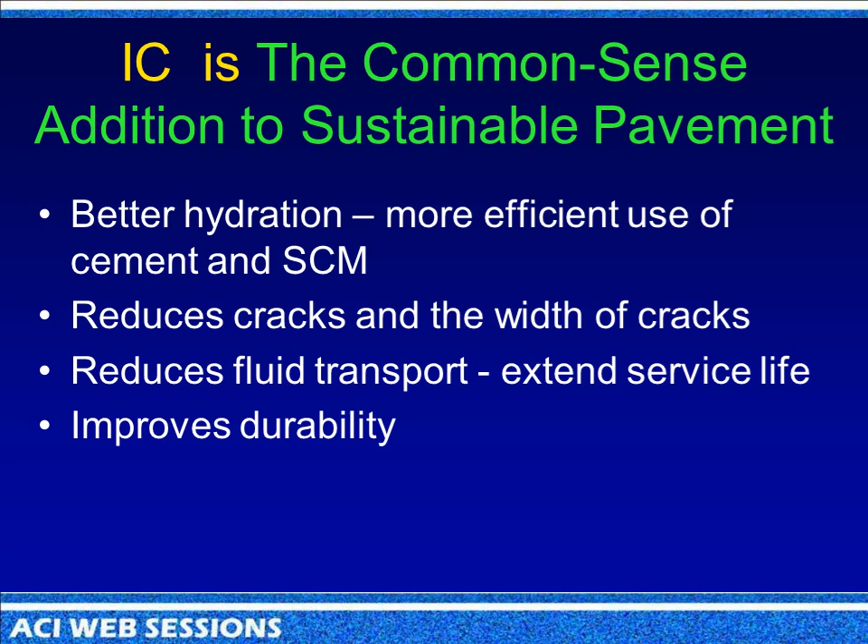Internal curing is a common sense approach to sustainable pavements: better hydration, more efficient use of cement and supplementary cementitious materials, reduced cracks and crack width, and it reduces fluid transport, extending your service life. It improves durability, increases your strength, and there's even more benefits. You can actually get greener concrete because, like everybody wants to do, it's more fly ash.

Well, let me tell you, the chemical shrinkage of fly ash is twice that of cement, and the chemical shrinkage of slag is 4 times that of cement. So you got to get the water. Judy was talking about how dense these mixes are. You can't get the water in to cure them.

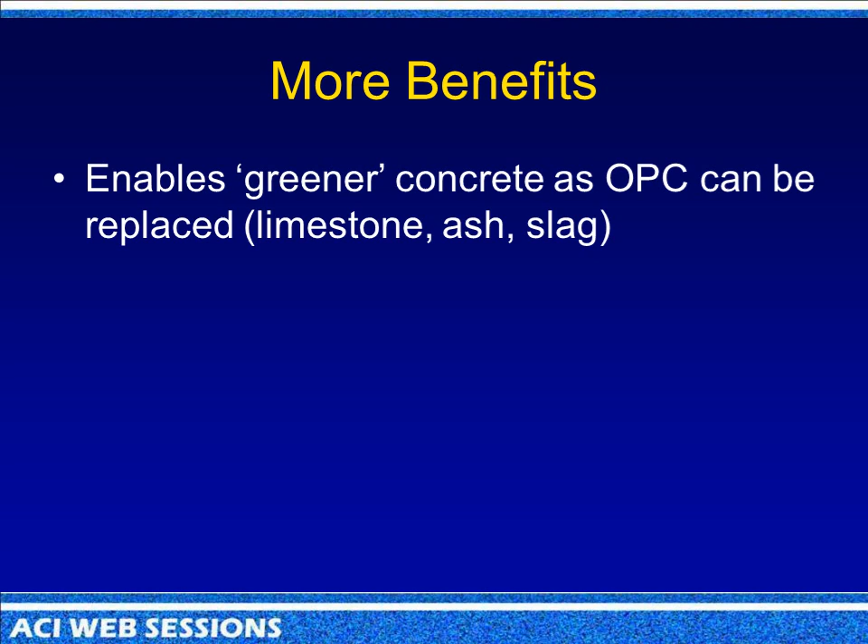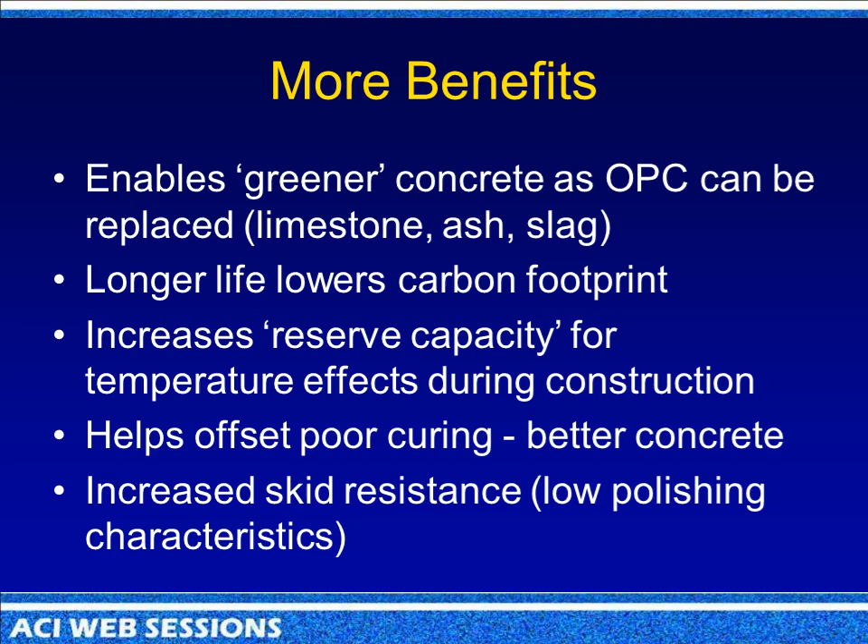If you can bring the water in on the inside, you can make these great mixes even better, a lot better. You get longer service life, lower carbon footprint. You have a better fluctuation with the temperatures, it helps offset poor curing, and it can even actually increase the skid resistance. So, can we do it?

Yes, we can. We have the knowledge, and we have numerous research reports saying that internal curing extends the service life. We have solid field data that's pointing all in that direction. And all we need to do is shift our attitudes from 40 years to 100 years. And it's a pretty simple process. The bridge industry did it. They designed 100-year bridges.

So I'm going to leave you with this. All great truths begin as blasphemy. And one great truth is, this is the only thing you need to remember: all concrete goes better with internal curing. Thank you very much.

You're welcome. Now, we do have time for questions. Go ahead, sir. In your opinion, is there a minimum absorption you're going to look for in a lightweight? Or are you just going to proportion? It's a proportioning thing. Let's say you get a lightweight aggregate that has a very low percentage of absorption. You probably would need more of that than an aggregate with a higher absorption, because what you're after is a certain amount of water to hydrate all the cement. What would you consider low in this case?

7-8%. Okay. But see, the other thing is you want to distribute, because you're only getting about 2 millimeters from the aggregate itself. So the smaller aggregates are a lot better because they're distributed throughout the mixture, and therefore you got to come in contact with the cementitious material. Right. Okay. Thanks. Thank you.